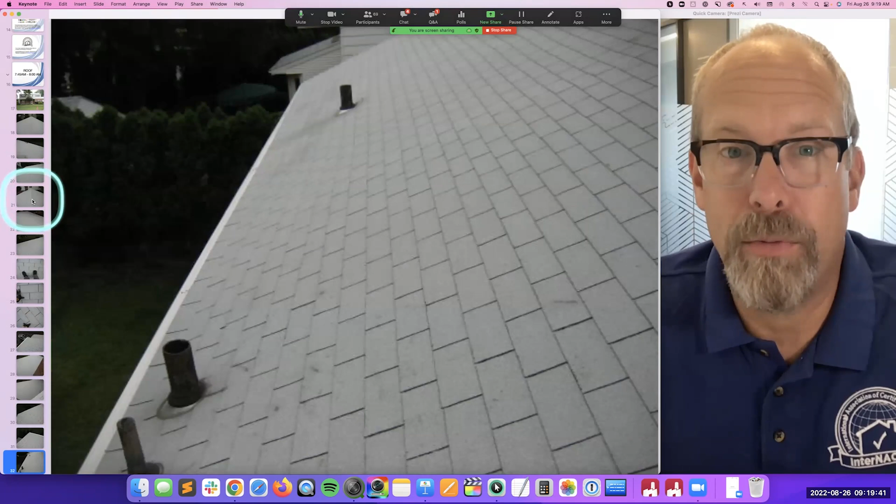Maybe you can just go to the gutter edge. Maybe you can go to the rake board or gable or something, get up there. But when I get up on the roof, if you're going to do it safely, it's not a safe act. If you're not trained or confident, don't go up on the roof. But when I do go up on the roof, I look at everything.

I look at every surface, every plane, and I take a picture of everything. I'll take probably 30 pictures of the roof. Maybe 9 of them will appear in the report. But I'm taking pictures because it's digital, it's free.

And I'm looking at anything that penetrates the roof or comes in contact with the roof, abuts it or bumps into it or is connected to it or touches it. These are flashing areas of vent pipes. There's probably a bathroom kind of thing, kitchen is the main stack, and it's got flashing around it, some neoprene rubber membrane, some metal flashing, and it's tucked under there. And the roofer put some sealant there.

You don't need the sealant if it's installed, but I like it. Looks really good. This is the second one on the other side of the house. Not bad at all. It's a very tight installation, really good.

And there's other things that penetrate through the roof. This is a roof vent, a fan, powered fan. Sometimes they're cracked and damaged. These fasteners, they're never stainless steel. There's always rusting, and there's flashing around here too.

It's the same thing. There's a hole. You cut a hole through the roof shingles, the underlayment, and the sheathing, and you install something through it. And that looks really good.

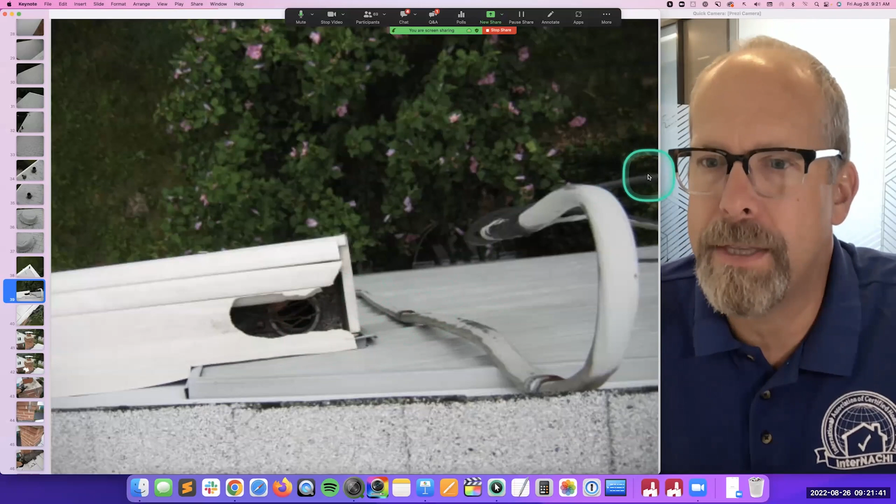And there's the electrical line, the overhead conductors. The service line coming in is probably a drip loop here, and it comes up. This is attached here, and it's probably fastened somewhere else. Then this is the drip loop, and it droops up, and it goes back down. There's probably an electric meter there. And I can see a tree, and it looks like a window well cover, a half circle there, plastic.

So while you're inspecting, there's the attachment point and the connections of the electrical line. And there's the air conditioner there. While you're inspecting one thing, you're looking at other things as well.

There's a chimney, masonry chimney, brick, with a cap on top or a wash, and some of the concrete is cracked a little bit here. Not bad. There's the interior flue. You're not required to inspect the interior of any chimney stack, and this looks good, the cap and the screen.

That bolt there looks a little rusty. I would take it off if I can, just to look inside. I go a little further - I exceed the standards of practice if I can. Sometimes when I look inside a chimney stack, I can see things.

And then this isn't any good. You never need to use a lot of black tar sealant or silicone or paint of any kind on flashing that's properly installed. So if this was properly installed, we wouldn't have this problem here. So we have a problem here. This is a Band-Aid, not a permanent solution. Somebody came up and slapped a lot of roof tar there, and that's not going to work.

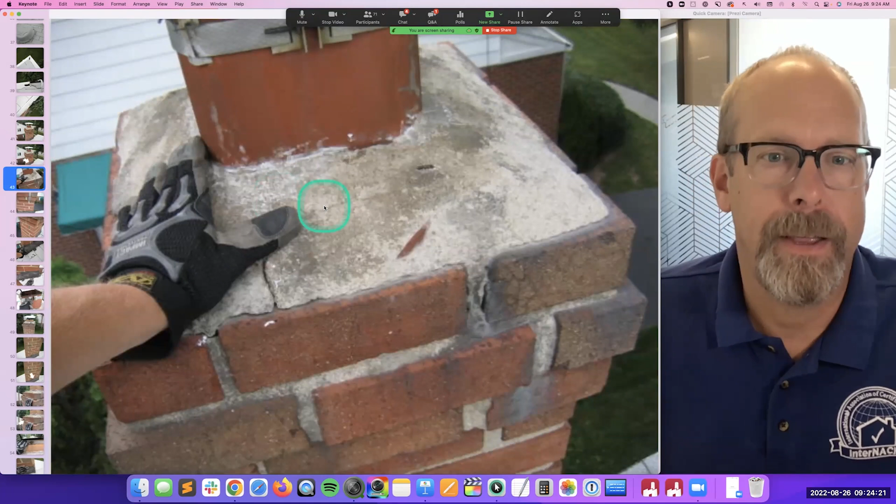Here's the top. I take a look at that. Maybe a little repair there is needed. Not bad.

Masonry looks good, that looks good. That's not - this is not good. There's flashing under there. I bet there's an open edge of flashing here where the step flashing comes up and there isn't a counter flashing or cover flashing. So we're missing something here. Not sure what's going on, but this is not the correct repair.

That's not going to last. And then I can't take this off - this is rusted, I'm not going to break anything. Sometimes when you crank it and try to open it up, maybe if I could just loosen it and then wiggle this up, I can take a look down here.

I like to take a look down the flue. I'm not required to, but sometimes when I do, and I see a hole in the interior flue liner, that's no good. When I see deterioration or maybe even missing liner, that's not good, and so I'll put it in the report. If I don't see anything, I'm not going to comment on the condition of the interior flue - I won't say, oh, the interior flue of the fireplace is in great shape.

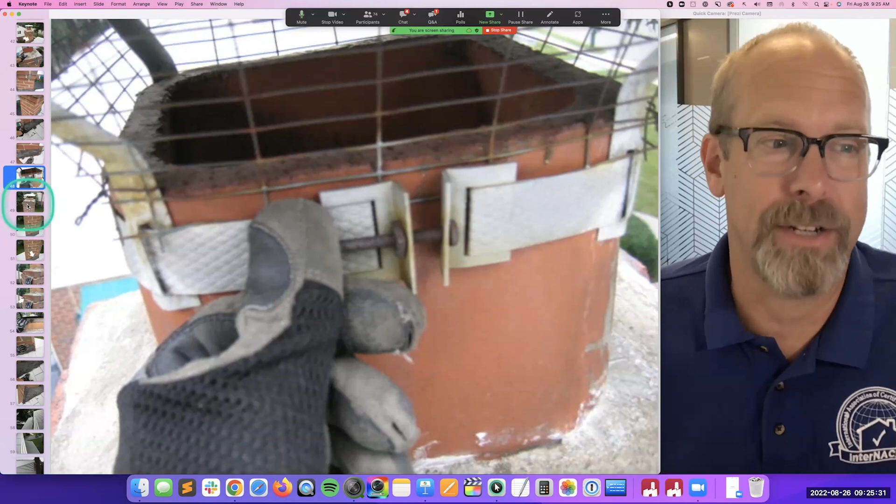Let's see, by the way, is this a fireplace? No, fireplaces are usually rectangular - this is a square flue. This is a heating system. I've got an oil-fired burner appliance heating system, or gas, something. Oil would be a lot dirtier, so it's probably gas.

Here's the rectangular flue, rectangular stack, masonry. This is probably a fireplace here. And if you're in a warm climate without this issue, that's good. This is what we got to do in cold climates - we got to deal with chimney stacks and fireplaces. And so I can see right here that this needs to be repaired.

We've got some open holes for water. So no matter where you are, let's say you don't inspect chimneys because in your area there are no fireplaces - it's just a fun exercise. Imagine water running, falling down and hitting this cap on the fireplace and then dripping down.

We need to divert this water away, and right now you've got an open hole, open holes, open hole. And this can get in, and water can do amazing things - it can destroy things. So we want to divert that water away from this chimney stack.

The stack itself looks pretty good, but again, same contractor, same flashing problem, same repair attempt. And there's the holes there, right? We want water to - oops, that's got to be repaired. We want water to be diverted around and fall through, and that's not happening here. We don't want water to go inside a chimney stack.

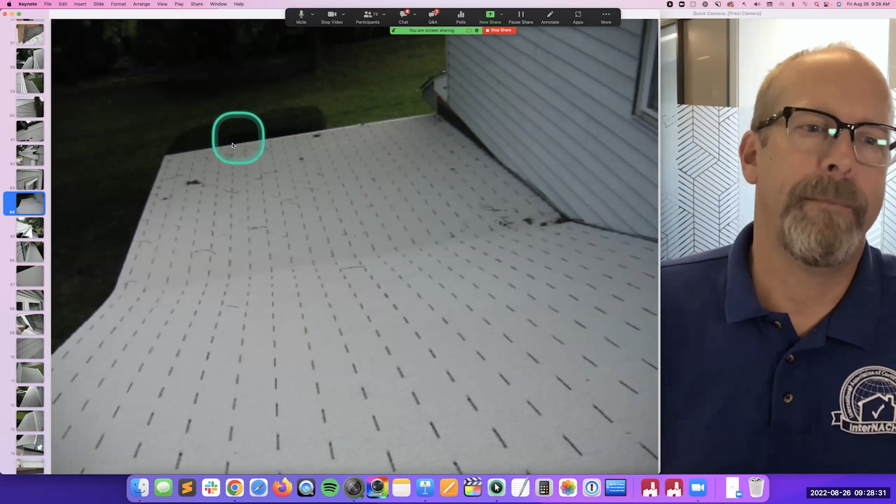This is the roof over the garage, going towards the back. I think it's kind of neat there—same condition, same asphalt three-tab shingles. There's the front porch roof, not bad. I don't see anything wrong with the roof covering materials.

Again, I'm looking at other things when I'm coming down. There's a lot to look at—there's the gutter, there's the fascia. I guess you call this the eaves, but it's really not an overhang.

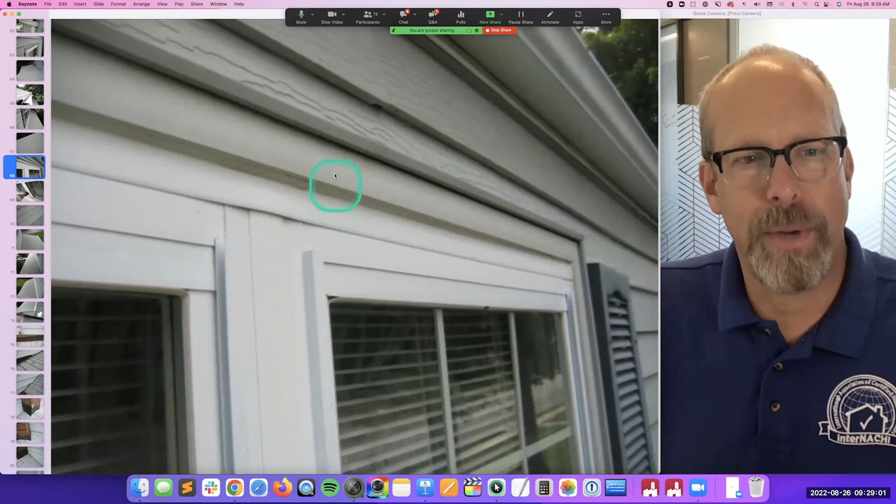There's siding here, and they cut the siding and put in the flashing, the J channel, for the window. The window was a different size—I think the original one was pulled out, so they had to make up for the distance between this window and the original opening. So there's a lot of flashing going on here, but it was done well.

Looking good—aluminum flashing, aluminum siding. Not bad at all.

So when the roof section over the garage intersects with the house brick, same kind of thing with the chimneys, right? It's just gooped up with flashing. And we've got some deterioration of the wood trim—no big deal there, but it's this:

I see the step flashing with every row, but the counter flashing is missing, and that could be a problem. I'm going to try to remember to inspect that now. Same thing here—here's the stack going through the garage roof. I'm going to try to remember to inspect all these intersections.

I love it where there's two different types of material coming in contact with each other, and right here is a really cool spot. There's three, right? There's the aluminum siding, roof covering materials, and the masonry chimney stack. All this stuff has to be done really well—it's basic building standards with water diversion in mind.

You have to divert water away. It's always covered and pushed away, layered and pushed away—you've got to push that away. So if you're in an area that rains a lot, it's really important to think about where that water is going. A healthy home is a dry home, so you want to keep that home nice and dry.

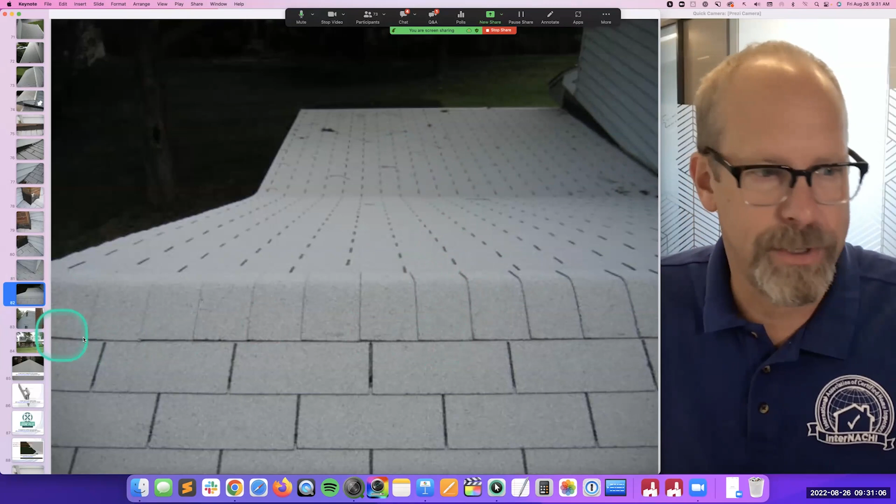And there's that attached garage. I don't think this shingle roof is original to the house, because they attached this garage. And there's the vent, right? There's the gable vent—we saw the roof fan and the gable vents. That's the ventilation. Remember the eaves? They weren't really soffit vents there.

So, okay, now we've got a good picture of the roof. If you don't know how to inspect a roof step by step, don't have a checklist, don't know what to inspect, or aren't sure what to say, that's no problem.

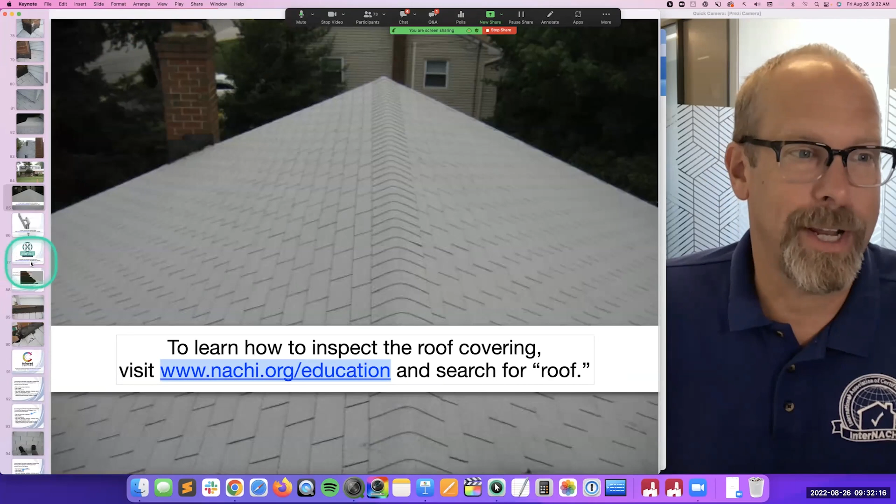It's a really good course. This section covers the difference between roof slope and pitch. What is the difference there? You want to use the word slope. Pitch is... I'll show you what pitch is, ready? This is pitch, and roof slope is that. This is roof slope, and that's pitch.

If you don't know how to use a ladder, don't use one until you take some kind of ladder safety course. We actually have a couple. Go back to the education page and type in ladder, and ladder safety training courses come right up. We also have videos on it as well.

It's a really good course. How do you set up a ladder safely? How do you use a ladder? How do you climb a ladder? How do you put a ladder away? Why would you use a ladder?

If you don't want to use a ladder to get up on a roof, we help you get trained to take the FAA pilot license exam. If you're flying for commercial purposes, you definitely have to get FAA certification and take an exam. And if you want to fly for fun, you have to take an exam too. We have a course to help you take that exam, a recreational exam, just for fun. If you want to fly for fun, you have to have taken that exam.

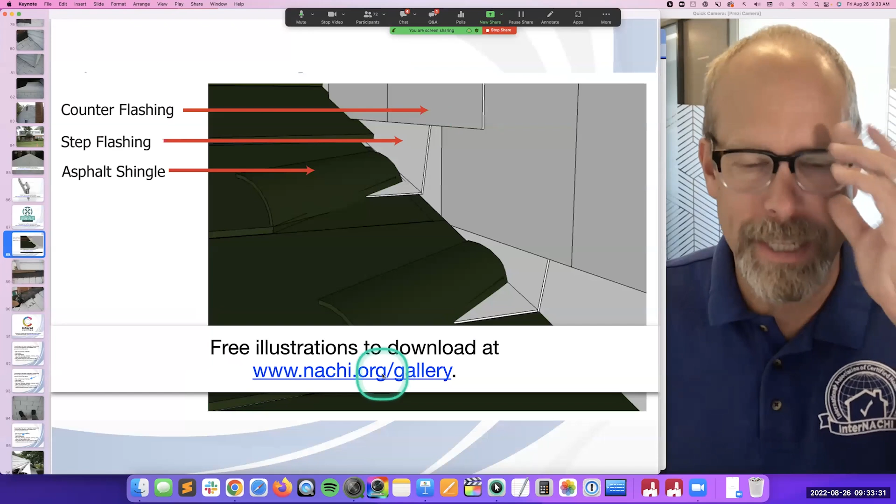Here's a little illustration that helps you learn about flashing, step flashing, and counter flashing. It also helps you explain in your inspection reports what you're talking about. This is a pretty decent illustration showing counter flashing covering the step flashing that tucks under the layers of shingles. You can download these illustrations from nachi.org/gallery, our gallery of illustrations, and it'll help explain what's going on here and why this at the brick and chimney isn't good either.

Now we were talking about water, right? Water is a lot of fun to see when you're a trained home inspector, and sometimes it causes mold and wood damage and things like that. But in order to see things that other inspectors can't see with their eyes in relation to moisture intrusion, water penetration, water problems, roof leaks at flashing areas, you should get an infrared camera. They're $400, $500, $600, whatever, but it allows you to see things that no one else can. So it's a great investment.

If you're new, I would make some money first. Do about 10 inspections, 20 inspections first. Build up some money and then invest in a really nice tool like infrared, right? And you can become infrared certified at nachi.org/certification.

Finally, we're getting to the standards of practice. Standards of practice tells you what you're supposed to inspect and what you don't have to inspect. Right here it says roof covering materials. You are required to inspect the roof covering materials. You're not required to inspect the roof system. A system comprises many different parts, and you're not required to inspect the entire roof system. You're required to inspect the roof covering materials. That phrase is really important.

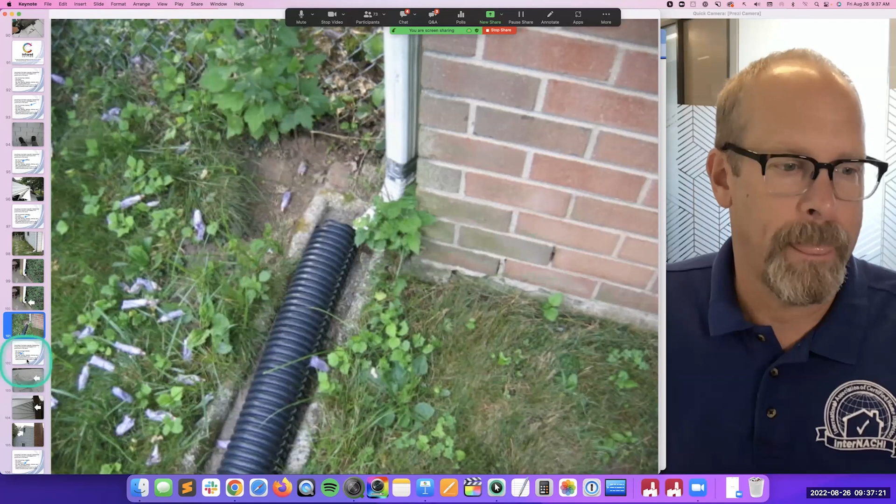According to the standards of practice, we have to inspect vents. Got it - roof fan, remember that roof fan? Remember the gable vent? There's another gable vent on the other side of the house. So I know there's an attic space in here.

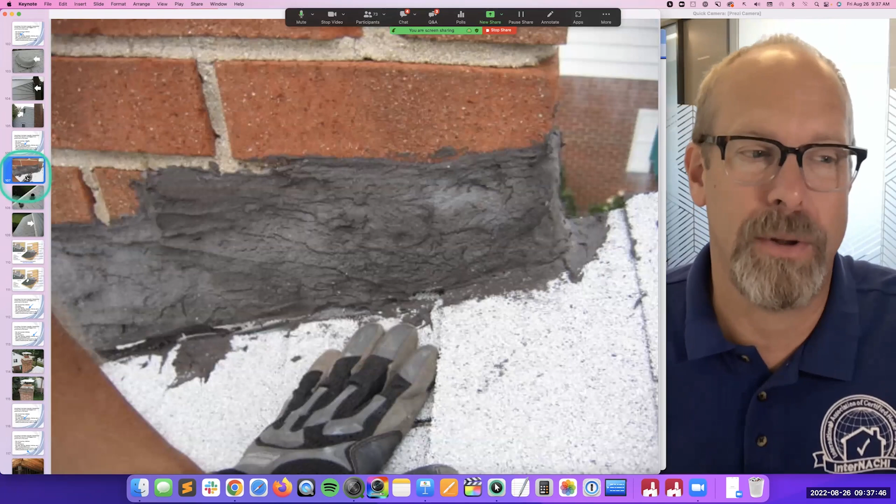We're required to inspect the flashing. We've got flashing problems, right? It could be there, it could be installed, but it's not installed properly. I'm not supposed to see this. There's flashing around the vent pipes, anything that penetrates through the roof. And there's flashing where the roof meets a wall, maybe of the house, or the siding. We have an illustration to help you with that - remember, it's at nachi.org/gallery.

So you've got the components of this flashing area, right? You can't see all these components, but here they are. They're all layered together in relation to diverting water away from the house, all layered in a way that diverts water away from the house.

And so we inspected this little guy that's observable, right? That's the flashing, and the siding is the counter flashing. So if we go back up, there's the flashing - that's nice. The siding is the counter flashing, and this is the roof covering materials. Those are the three things we can see. Seems to be in good shape.

To explain what we're doing - inspecting, describing, and reporting - you can use an illustration from InterNACHI's gallery in your inspection report. It really makes the inspection report, like my report that we're going to go over, look really good.

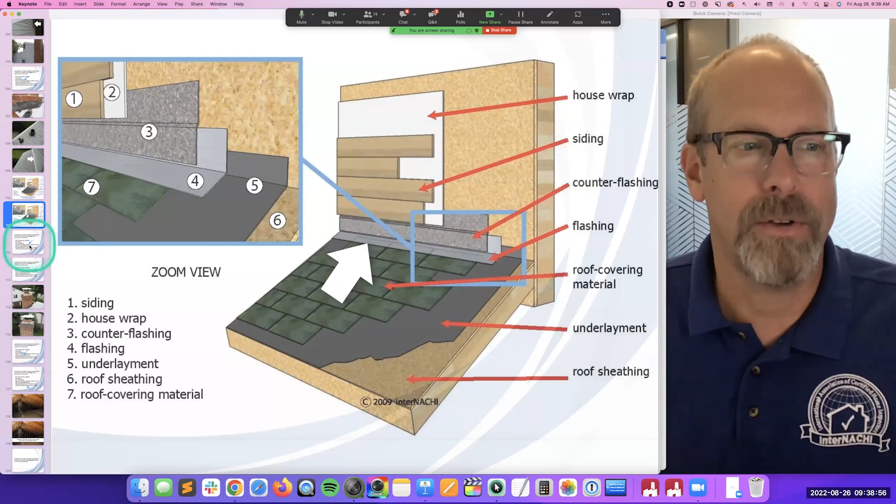Skylights, we don't have any skylights. Chimney, we got some chimneys - 2 chimneys, heating system, fireplace. We got flashing problems, right? And also some mortar that's missing.

And other roof penetrations - we saw the other roof penetrations and the structure from the roof, from the panels and doors and stairs. That's basically the attic, if you can get in the attic. So I don't go in the attic first, I do it around 2 hours in. I'll be in the attic space.

Some inspectors start in the attic and want to inspect underneath before they get up on the roof. That's fine - whatever your inspection process is, make sure you have one, write it down, and follow it. Hopefully it's concise and helps you be efficient with your time. So the inspection of the under-roof attic space, for me, actually comes later in the process, but in the standards of practice it's tucked with the roof section.

You're required to describe things - to inspect, describe, and report every system. So we have to describe the roof covering materials, 3-tab asphalt shingles, and report any roof leaks or need of correction of observed indications of active roof leaks. I didn't see any in this house, nothing active, but I'm going to make recommendations for corrections at the flashing.

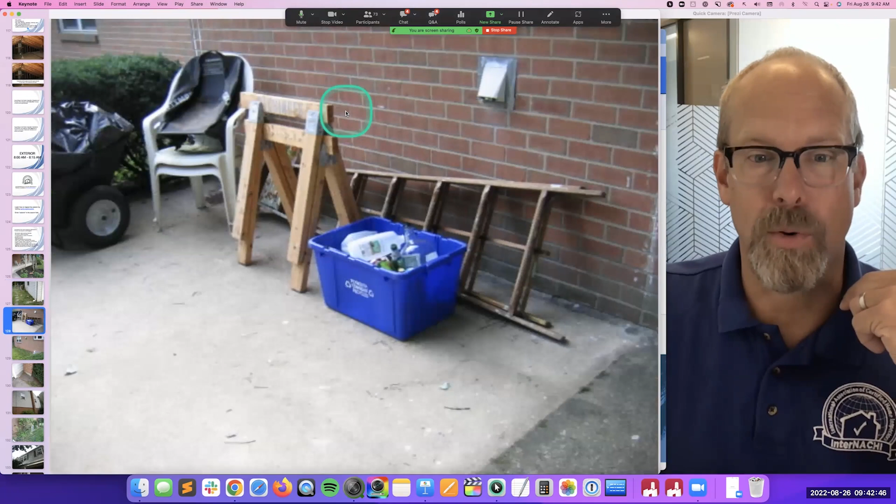So I'm going around the bend and looking at things. Well, this we already saw - the downspout, the grading looks good, the siding. That's not too loose, that's okay. Going around the corner, there's a concrete patio in the back with brick, and that looks like a dryer vent with ductwork on it. I can't see everything because there's personal items, and I'm not required to move them.

Then there's the brick exterior - really nice, a little exposed foundation, so that's good. There's a window well, looks like maybe a kitchen window, maybe a bedroom - probably a bathroom. Then there's a little patching here, like this area got some water puddling up and they threw in some asphalt or something. I don't know what's going on there to divert water away from that corner.

I'll try to remember that in the basement. There's the chimney stack on the side of the house, the air conditioner unit, electric meter, a service line, a window well, another window well. There's a garden hose holder, so I know that's a spigot hose bib, and the grading is sloped away, so that's good. There's a lot of vegetation there - I can't see everything, so that's going to be an inspection restriction in my report.

And then there's the siding, the windows, and then I'm at the front again. Then I'm gonna go around again.

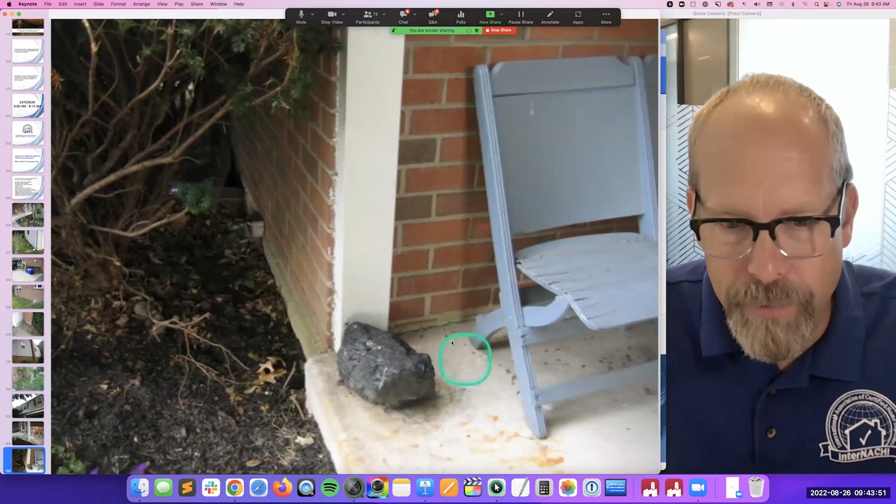I'm taking a look where the front porch meets the front of the house, and there's a little crack and settlement - doesn't look too bad. There's something going on there I can't really see. The front porch left, and this is right - this looks good. Then the front door, that step looks good, no deterioration, no wood rot there. Then the sidewalk, no trip hazards there.

And the driveway looks great, no trip hazards or major cracks. There's the main vent stack for this public sewer, and the asphalt looks good. The bottom of the garage door and the door panels look really good.

So I'm going around and looking at the siding again. The back side of the siding looks really good - we already saw this from the roof. There's a spotlight there and a spotlight here, and there's the underside of this. They didn't want squirrels or birds to go into this little opening where the double beam is, the load-bearing beam. There's a little overhang, a little detail of a bracket and spotlight, and it looks good. I don't see any problems with the siding - looks really tight.

This looks like a little flat area where maybe when it rains really hard it pours a little bit and puddles, not sure. There's window well covers, like every window of the basement. So there's a full story below ground level, and there's a window well - a window in the foundation wall, like a half circle. It's not really a fire and rescue escape, just a window, and they've got these nice new plastic covers, the stickers even on it.

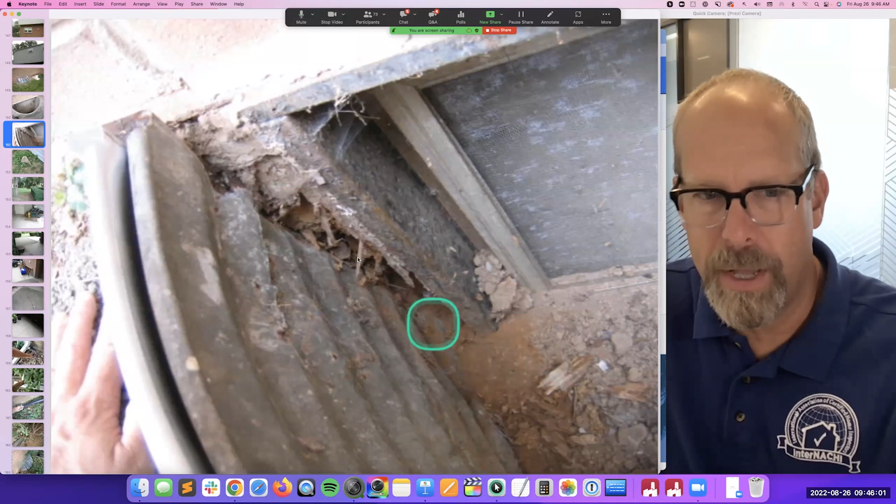Then there's some moisture here and some puddling, so now I'm thinking maybe there's some issues with water penetration going in. So I open up a window well and look inside, and it's filled with dirt and stone, with dirt coming through the sides. There's mud, and I don't think it drains - it's real close, coming into the window. So I'm gonna keep that to myself, just paying attention to how all this water is pushing the dirt through the window well. This is where things touch - I like to inspect where two different materials, two different components intersect. So there's this, and there's this coming in.

On the other side, I wrap around again, there's a tree stump. Ideally, you'd grind that down and get rid of it. This is like candy for termites and carpenter ants - it's just an open invitation. You know how a farm calls you in for dinner, ding ding ding ding? That's what this is. Dinner. So you got to get rid of that.

And then this was patched up. There's a little rot. We actually have a tree course on how to inspect trees, which might be interesting to you. You don't have to, but anything near a house, I'll take a look at it and comment on what we've got here.

Something to monitor. In the back, you've got a sloping concrete floor. That's really nice because a lot of it is exposed to the rain. So you want that nice slope, not a trip hazard, just a nice gradual slope. There's a percentage specified in the code, the International Residential Code, for just a nice slope.

It should not be a negative slope. A negative slope is where this is actually sloping towards the house. We don't want that - we don't want to be catching water with a hard surface and directing it towards the house. We want to be directing it away from the house, sloping it away from the house.

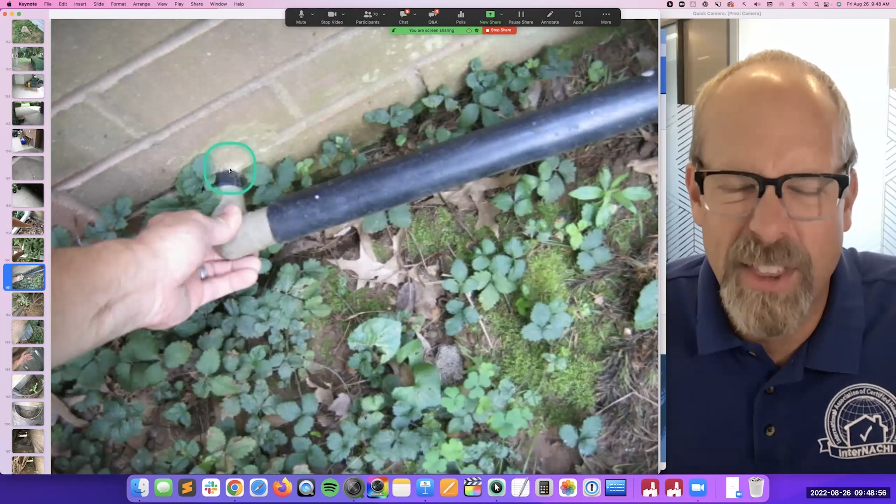There's another pipe here too. Now I'm thinking, what are all these pipes next to the downspouts? Oh, sump pumps - I bet there's a sump pump in the basement and it's discharging outside. I'm not sure where these pipes go, so it's a good question. Oh, there's another one - the third pipe. I think there are 3 sump pumps. I'm a little concerned, and I can't possibly follow this. I don't know where this is going.

This bush here is really close to the house foundation, and there's a lot going on in here. Like this is a low area, looks kind of muddy and wet. There's an old downspout discharge pipe here, a splash block. There's something going on with water, right? Indications of what - I'm not going to say anything right now, but I don't know.

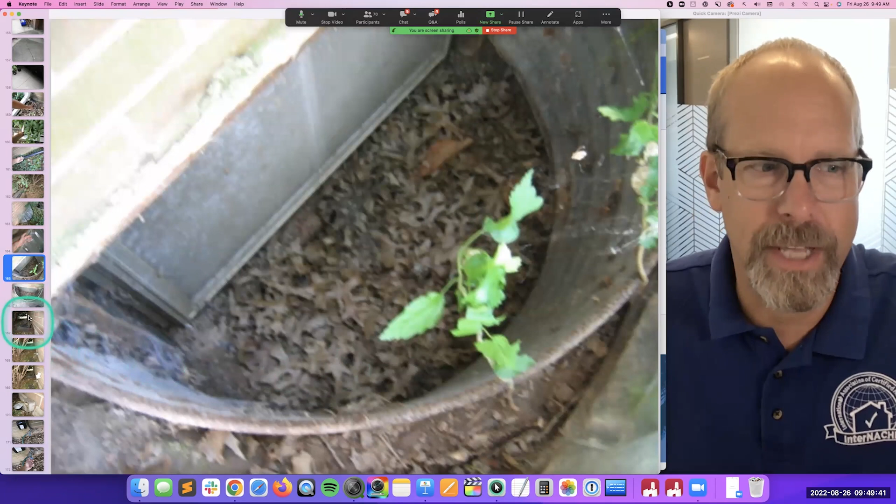This is an old window well cover. It's been grown over and the ground has crept up to meet it, so I try to open it up. It's cracked. I take a look inside - it's just filled with debris, just like the other one. There's a third one. This one here is interesting because there's 2 window wells.

Can you see them? There's 2 of them. I think I know why. This one here is original to the house, and then they had water problems and water kept coming in. So they added dirt around the house to get that slope away from the house. You want the ground around the house to slope away, like 6 inches for the first 10 feet around the perimeter. But when they added more dirt, this was too short, so they got another window well, another half circle, and added another one on top. Now I see efforts to fix water problems around the house.

Okay, so I can't wait to get in the basement. Kind of excited - this is the fun stuff of being a home inspector.

This one here is under the bushes. I crawled under there. You can see the rusted window well and the cover isn't there, so it's probably some water intrusion going on there. And that's the window well under the bushes. When I was coming back out, I almost tripped on this, and that's an electrical box.

So you bump into things literally. And that's the one thing I want you to get out of this class: when you have an inspection process and a standard by which you inspect, and you follow that standard, you are efficient with your time, you provide a really great service, you reduce the number of mistakes you make, and the defects that may exist in a home literally pop out at you.

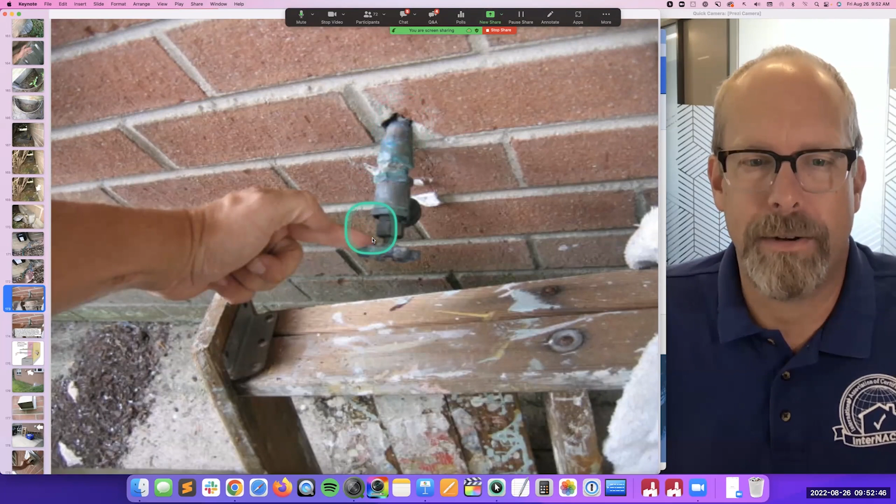So hose bibs are subject to freezing temperatures, including frost-proof hose bibs. They should have their stem extended through the building insulation into an open, heated, or semi-conditioned space. There should also be an accessible shutoff valve installed on the water supply pipe that leads to the hose bib on the inside of the house.

Still going around the house. I don't know what this is. I don't think it's a dryer vent — it looks too clean, and it has a screen, and there is no lint. I think it's a bathroom exhaust fan, or maybe the kitchen exhaust fan, something. If I don't know, I'm not going to say. I'm just going to look.

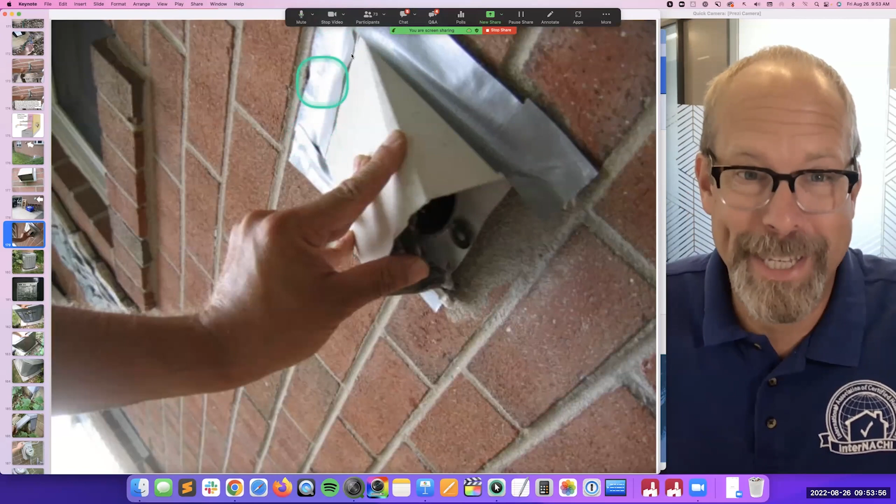Well, that looks pretty good. It's installed. It can't be a dryer vent — we can't have a screen on a dryer exhaust. Here's the dryer exhaust, it's pretty obvious, there's a lot of lint coming out. It's open, that's good, but it's been duct taped. So that's no good, right?

Air conditioner, new to the house. Nice base, it's fantastic, I'm glad to see that. Got the label, got the manufacturer. It's stable. Pictures of the exterior, no damage, relatively new, sealed, installed well, electric disconnect.

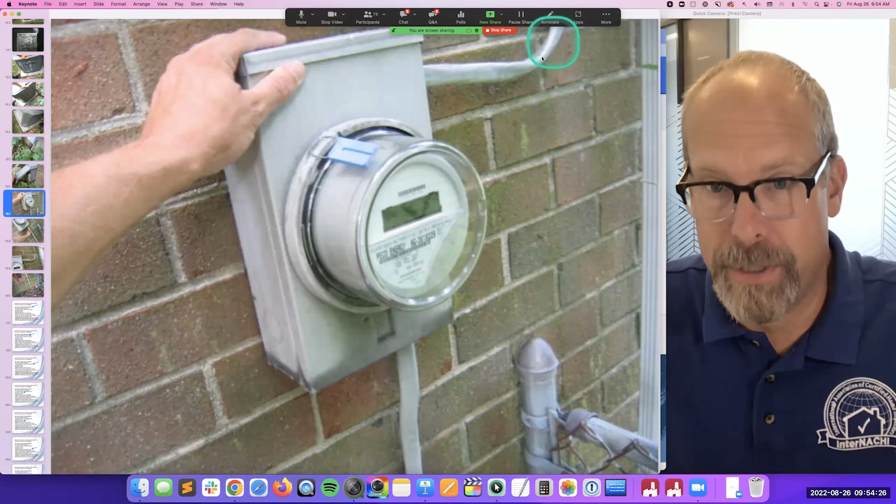And then there's the electric meter box, electric meter box. There's the service entrance, service line coming in. That one's going to the electrical panel, I bet, down in the basement. All that line looks good — a little rust, minor, no big deal, no damage, looking really good. I don't see a grounding, usually like a grounding conductor, but grounding electrode conductor, I can't see it. It's okay, if you can't see it, you can't see it.

So that's the exterior — that's about 15, maybe 20 minutes. And this is all the things that we're required to inspect: the exterior wall covering materials, we did that. Soffit, eaves, and fascia, we did that.

Representative number of windows — can't inspect every window, second floor windows are too far away. All exterior doors, we did that. Flashing and trim, adjacent walkways and driveways, stairs, stoops, stairways, and ramps, we did that. Porches, patios, decks, balconies, and carports.

Remember that crack in the concrete? Railings, guard handrails — we don't have any. Vegetation — yeah, we got some vegetation problem in that old tree stump and the damage to the existing tree, and some dense vegetation. Surface drainage — we got some concerns about that. Retaining walls, none of those. And the grading around the property — remember that? Yeah, the grading around the property where it may adversely affect the structure due to moisture intrusion.

I think that's our concern. I'm not going to say anything to my client quite yet. I'll tell them I'm not going to make any conclusions at all — that's not my job. My job is to inspect, describe, and report, and make recommendations to correct if needed. So I'm just going to hold off on that until I get in the basement.

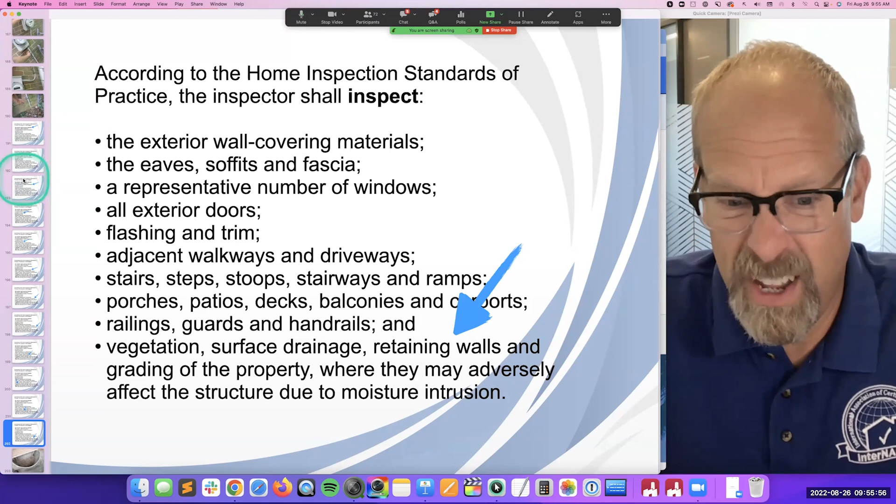We're required to describe the type of exterior wall covering materials. That's pretty easy. And report any problems with railings.

Okay, the next big system, do you remember, is heating. And heating takes me about 15 minutes. Let's have two systems, then that's a half an hour.

And they're split, maybe one in the attic. But this one has one heating system. And it's not that bad to inspect a heating system. 15 minutes, right? Turn it on, turn it off. And there's a standard by which you do that using normal operating controls. That's why it doesn't have to take very long.

I'm not an HVAC technician. I'm going to use normal operating controls, which basically means the thermostat. Here's the heating system, and it's the cooling system as well. I can see the air conditioner here. I don't know why they turn this around.

But the heating system is here. It should be facing outwards so you can service it. So going around a corner, funny installation. And then this is cold air return through an air filter.

So it's forced air. I think, is it a heat pump? Or I see a gas pipe for the hot water tank. I bet it's a furnace, gas furnace. And so it gets heated up here, cooled off here.

This is a humidifier, an old humidifier, to humidify the air in the wintertime, because in cold climates, cold air is dry. So they like to humidify the air.

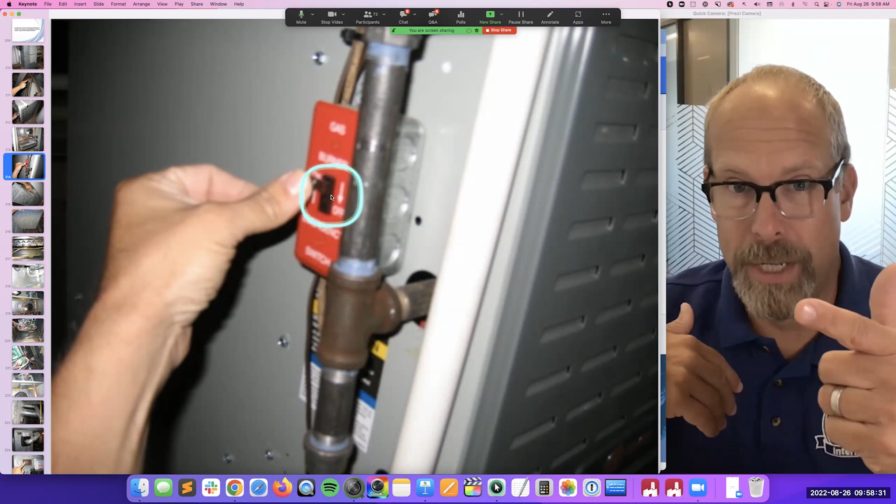I turn the service switch on, and I look and listen. And I listen for the cycle. There's a bunch of things that happen in a cycle, and we describe that in the course, How to Inspect a Heating System. It's also listed, what happens in a cycle for a gas furnace, in our checklist, and I can show you where those are.

Oh, and then it goes through the cycle, and then I turn off the unit, go upstairs, I let the thermostat run for a little bit, come back down, turn it on, and then I go back and I turn the air conditioning on.

It sounds really bad, but it's not. So it's back and forth a few times, 3 times. And in that way, I get to watch the furnace turn on in heating mode. I'm not going to heat up the whole house. I just want to hear the sequence of the burner and the draft inducer fan.

And then I turn on the air conditioning. I don't want to cool off the whole house. I just want to see a little temperature difference.

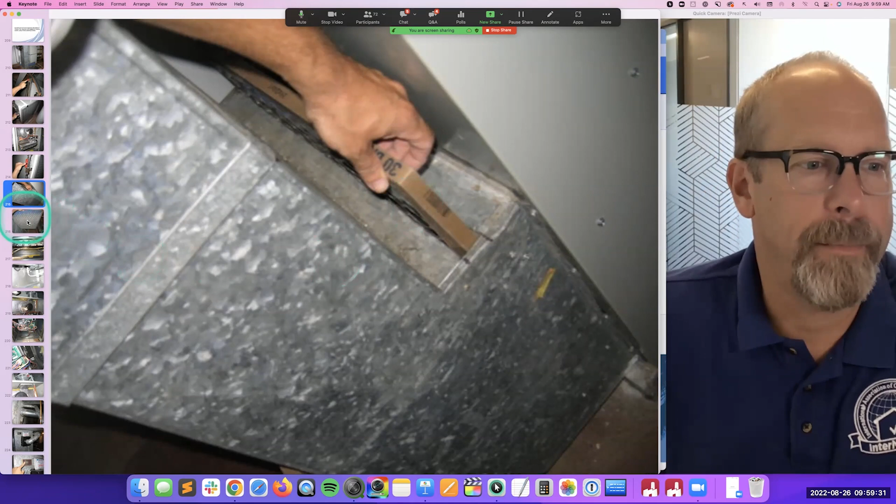Air filter is dirty, no big deal. That's in the burner ports. They're clean, that's great, nothing going on there. Igniter, draft inducer fan. I'm not concerned about any of this.

Looks great to me. I know about half of what is going on here. I don't know everything, don't need to, just a home inspector. But I'm looking for anything, like there's the motor there, anything that's wrong. One of the things I like to do is stick my hand in there. Don't.

Make sure this is not loose. I like to wiggle it a little bit and see what's going on, look for bad wiring, disconnected wiring, things that are maybe burnt or missing parts. All the sensors should be there. By the time you get here, there's a sensor on the door panel, there it is, that turns the unit off. So there's a couple things that when you remove a panel, there's a safety switch you're actually testing. And all this looks good.

The way the flue connector goes into the chimney stack. And this is the hot water tank, hot water source, smaller diameter. And this is the furnace.

All right, that's the humidifier. Humidifies the air. There's a little control.

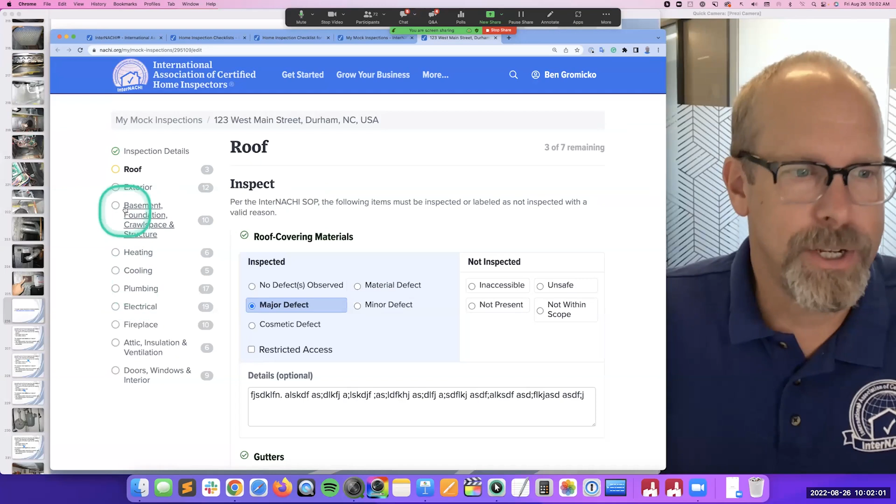So you enter your inspection details, the property address, get to the roof section. Let's jump to the exterior of the checklist. I wouldn't give this report to a client, you can convert it into a PDF, but it's just for practice. So if you need practice, this is a great system. Use InterNACHI's home inspection checklist software.

Exterior wall covering materials, no defects. Eaves, soffit, and fascia, no defects observed. Windows, no defects observed. All exterior doors, no defects. Flashing and trim of the siding, no defects. Adjacent walkways, no problems. Steps, stoops, stairways, and ramps, no defects observed. Porches, patios, decks, and carports, no defects, but there was a crack in the concrete patio in the back.

Monitoring is recommended. Okay, this is just for you, this isn't for your client. Guards, handrails, no problems with that. Vegetation, yep, so I have a minor defect. There's the tree that's there, and there's dense vegetation and inspection restriction.

Restricted access. Describe the type of exterior wall. So you go through, it's aluminum siding, report, did you note any improper spec? No. And you continue to the basement.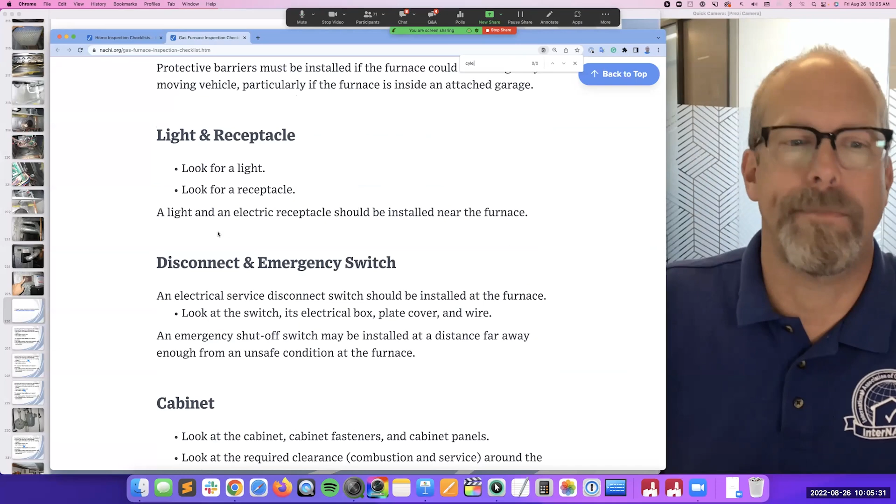So you go down and there's the gas furnace inspection checklist. You open up the gas furnace inspection checklist, you can download the checklist right here, it's in a Word document, so you can tweak it yourself. Let's see, is it cycle? No, something else, oh here it is. Here's the burner switch and the gas shutoff valve and the fan induced motor and condensate and igniter and flame and air distribution system. And then there's a sequence of operation. We also talk about airflow and delta T. So it's a really good checklist. We have lots of other checklists.

There's a home energy checklist, mold inspection, pool and spa checklist, radon mitigation inspection checklist.

When you do a home inspection, if there's a radon mitigation system, you can inspect it according to modern standards to see if it's installed properly. And someone's going to say, well, it was built to code back then, right?

It's probably not working. According to the home inspection standards of practice, we have to inspect the heating system with normal operating controls, the thermostat. We need to describe where the thermostat is, the energy source, and the heating method. The energy source here is natural gas.

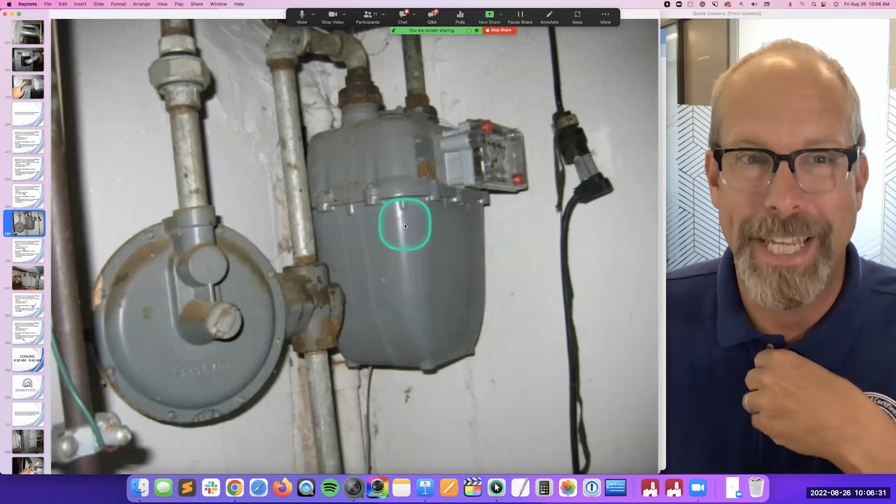In this old home, the gas meter is on the inside. Personally, I don't like that, but it's okay. The heating method is ductwork, so we saw that ductwork.

We have to report any heating system that didn't operate or was inaccessible. We didn't have that problem. Now cooling, another 15 minutes, maybe even less.

According to the standards of practice, we're required to inspect the cooling system using normal operating controls. It's the same thermostat. Here's the same unit. There's the refrigerant line, suction line, and liquid line.

There's the condensate line coming from the drain pan of the coil, and it drains. I'm following it, pan drains down. Where's it drain to? Because I know I'm underground, into a sump pump. Where's the sump pump go?

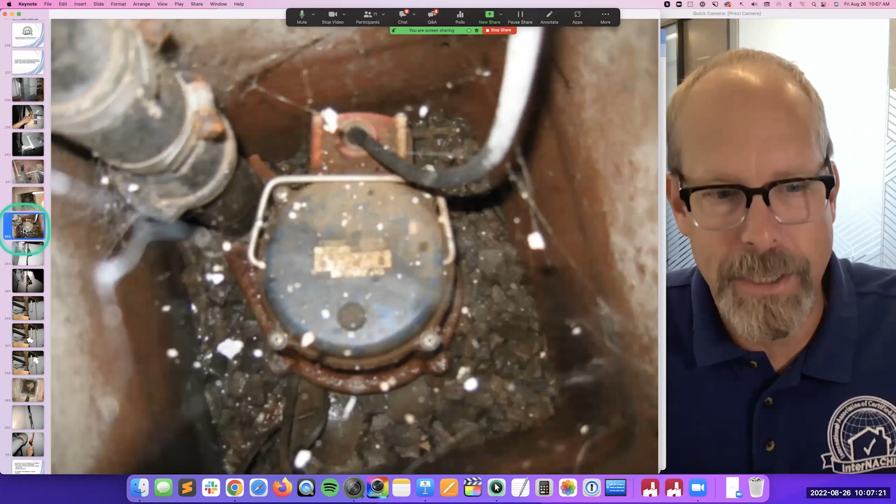Well, I can't turn it on. I could fill this up. There's no float, it's an interior float. So I'm just going to follow the discharge pipe.

The power to the sump pump is not good. Here's the grounding, a 3-prong receptacle, then it goes to a 2-prong, then to a 3-prong, then to an extension cord. This is supposed to be tied to each other because they keep separating, and this is no good. You want a nice ground.

Connection, so this has to be fixed. And this shouldn't be on an extension cord. It should really be in a wall receptacle on its own breaker, maybe. Here's the discharge pipe, found the sump pump discharge pipe.

It doesn't go outside, it goes into the public sewer system, which is against code. We're not code inspectors, but you all should know the plumbing standard. You're not supposed to put groundwater into your public sewer system. You shouldn't be pumping groundwater from your sump pump into your sewer line, your drainage line, your drain waste vent system of a house.

It should be going outside, and it used to go outside. For some reason, they changed their mind. So this used to go right here, and used to discharge outside. That's one of the 2, 3, 4 pipes that I saw outside. The seller knows what's going on.

I don't know what this is, some kind of sock or something. They wanted to stop bugs and insects from crawling into the pipe. So instead of just removing the pipe properly and capping it, they stuck this thing in, I don't know what it is. It's just a big mess. So this should discharge outside.

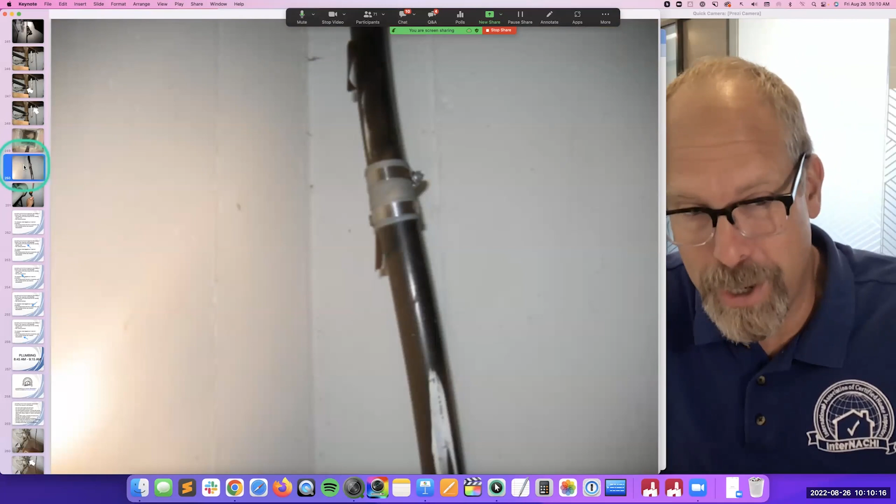So if they have a radon problem, it's coming right out of here. And this is not a nice plastic clean container, there's no cover on it. This is also plugged into an extension cord. This also goes outside, and it's plugged into an extension cord.

So now we have moisture issues, grading issues on the outside, indications of things going on outside, and indications of moisture intrusion and water problems on the inside. And the solution isn't very good. There's extension cords being used, pipes going in different directions not really discharging anywhere, and I can't find the ends of the discharge. There's evidence of standing water and a lot of moisture in the sump pump containers, and there's plumbing issues with the discharge, for one at least.

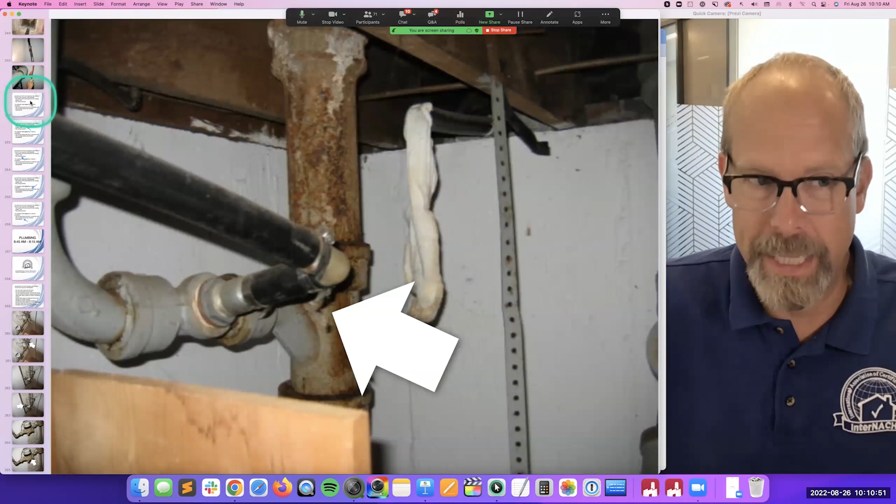That's just the cooling system. I still have to describe the location of the thermostat and the cooling method. It's the same thing—ductwork, and any cooling system that didn't operate or is deemed inaccessible.

Plumbing—we did a little bit of that with the sump pump. According to the standard of practice, I have to inspect all this stuff. I think of water coming in, plumbing, and water going out. Water coming in is the public water, the distribution water that comes into the house, and then drain waste vent going out. That's how I think of water.

Through a shutoff valve, through the meter, another shutoff valve. The meter itself has a little bit of rust on the bottom. I'm not concerned about it—I think it's just moisture—but I'm going to rub my hand along the bottom of the meter. And if it comes out any rust that looks like a water streak, I'm going to say it's leaking.

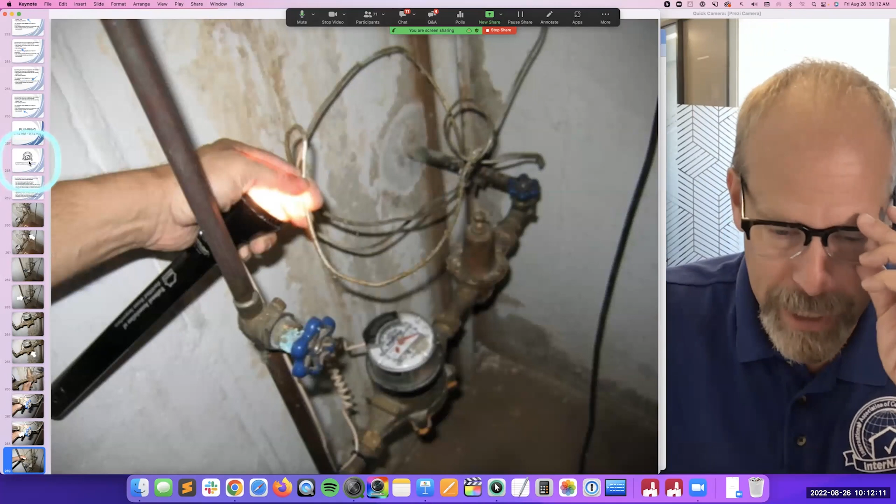It doesn't have to be wet for it to be an active leak, especially a plumbing leak at a valve. So if you're wondering what to say to a contractor, real estate agent, or seller who wants to argue with you, you don't have to. This is an indication of an active plumbing leak that has sealed itself and it's not leaking, but if you want to fool around with it, you can get it to be wet and dripping.

There's the bonding wire to the water line. We can talk about that later.

Now it's drain waste vent out, and this is a serious problem. This looks like a toilet flange that is leaking upstairs somewhere, and that's an active leak. I don't need an infrared or a moisture meter to tell that, and I'm not using my hand either.

And then there's all this wood damage underneath, and this is what this rust is all about. It's cast iron—cast iron tends to show a lot of rust when it's in poor shape. I use my screwdriver and try to poke right about there. If it can go in, that means that cast iron pipe was paper thin. You should not be able to go through with your screwdriver.

So I like to tap on metal pipes, especially drain waste pipes, not distribution. These look great—it was just that one toilet area that wasn't going very well. I want to see nice secured straps and supports every few feet, and the slope—not the pitch, the slope—of the drain waste vent sewer pipe going in the correct direction, downhill. It's got to go downhill.

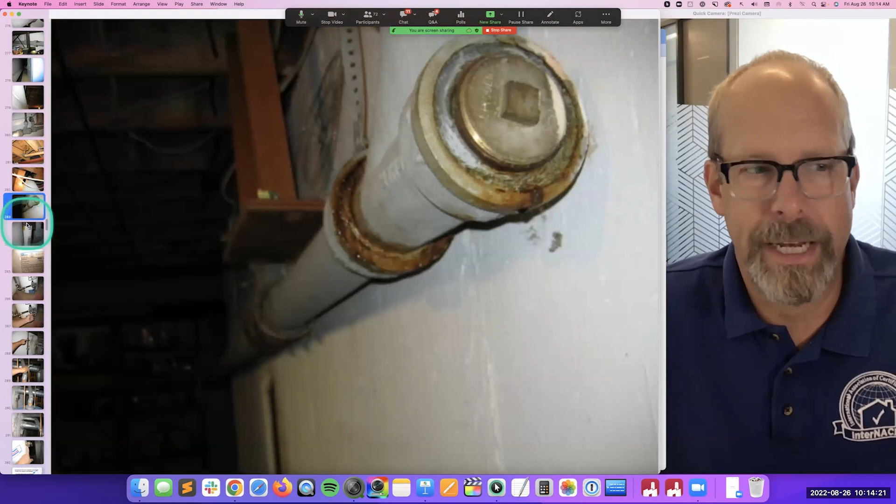And then got some copper coming from the sink or something above, and there's the stack, the vent stack, going up through the floors of the house. There's the clean out at the transition. There's the hot water source—so water coming in, water coming out. Where does it get heated?

Gas hot water tank, 40 gallons, gas drip—not really long, a big drip, but that's okay. It's not the best installation. Ideally it's right here, the drip.

That's where you turn it. I don't turn it—I don't turn any gas valves, I don't turn any water valves. There's no need for me to do that. If it turns on, great; if it doesn't turn off, that's not great, and since I turned it on, I'd be responsible.

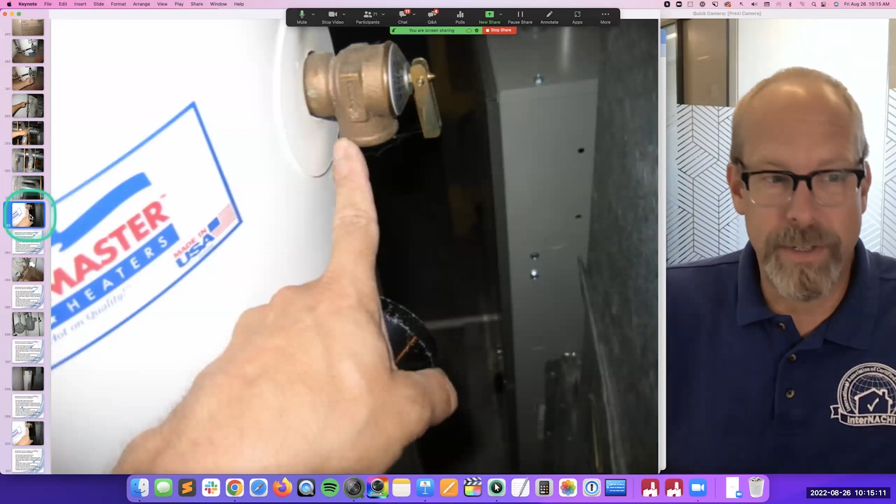There's the old gas shutoff valve, old water valve, and there's the flue. So cold water coming in, hot water going out, and the flue connection, vent connection. The TPR valve is missing. There are 14 requirements according to the International Residential Code for a TPR valve extension pipe—just the discharge pipe, 14 requirements. One of them is it has to be there, and this one isn't at all. So that's an easy call on me.

And I can inspect a hot water tank in several minutes according to my checklist.

We have a checklist on my phone, with even the 14 requirements for that discharge. It's an easy call because I'm following an inspection procedure, inspecting this system over and over again in the same way.

Here's what I'm required to inspect: the water supply shutoff valve, did that. Fuel shutoff valve, did that. Water heating equipment, including TPR valves, did that. There's a TPR valve missing, that's a defect.

Interior water supply, including all fixtures and faucets by running the water, I'll do that. I have to inspect all the toilets by flushing them, and all the sinks, tubs, and showers for functional drainage. I'll run water at the sinks, flush all the toilets, and check the showers.

Then there's the drain waste vent system, got a problem there. And the sump pumps, we got a problem there too. So we found some defects for sure.

You have to describe whether the water supply is public or private. It's public. Location of the water supply, fuel supply, and location of any fuel storage tank. There's no fuel storage tank. The capacity of the water system is 40 gallons, and I have to report all these as needing correction.

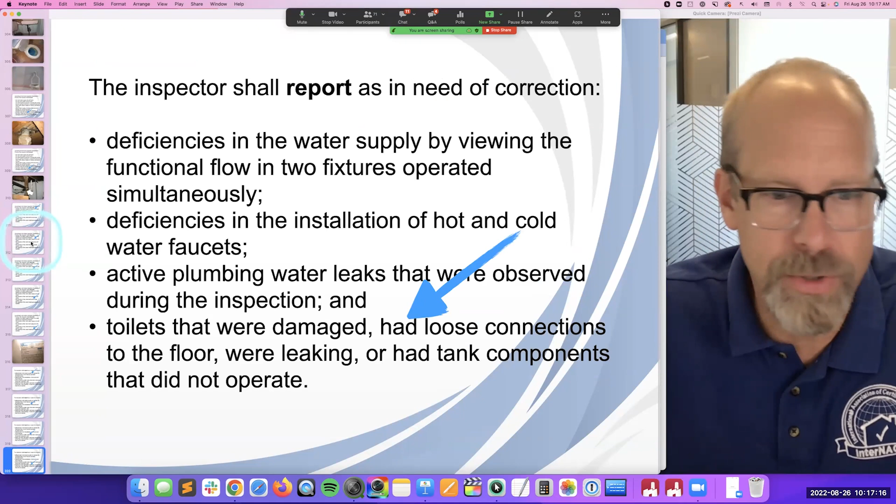Any leaks, any toilets that are damaged, loose components, leaking tanks, things like that, I'll do that later.

I really like this one, trying to find that toilet. You may get into the bathroom and it's tiled and the tile looks great. You can't tell a difference, nothing wrong, it's secured to the floor and looks great. But from underneath that tiled floor and that toilet, there's something going on. It's always great to get underneath.

Where are we? Electrical. Electrical's not very long. According to the standards of practice, there's a bunch of things I have to inspect. It looks overwhelming, but if you have a checklist on a mobile device as you're inspecting, it's no big deal.

Let's do it. Service drop. What's a service drop? Well, it's useful to use the same terminology as everyone else, contractors and code inspectors. Good resources are the International Residential Code, to find out what all that stuff means, or InterNACHI's free online course on how to perform residential electrical inspections. It has a section called service terminology, and we're going to talk about...

Service entrance cables, sheathing, point of connection, overhead service conductors, service drops, masts, laterals, meters, GECs, all that good stuff. That's in the free online electrical course. You can just take the course, open it up, and look at the first section that covers terminology.

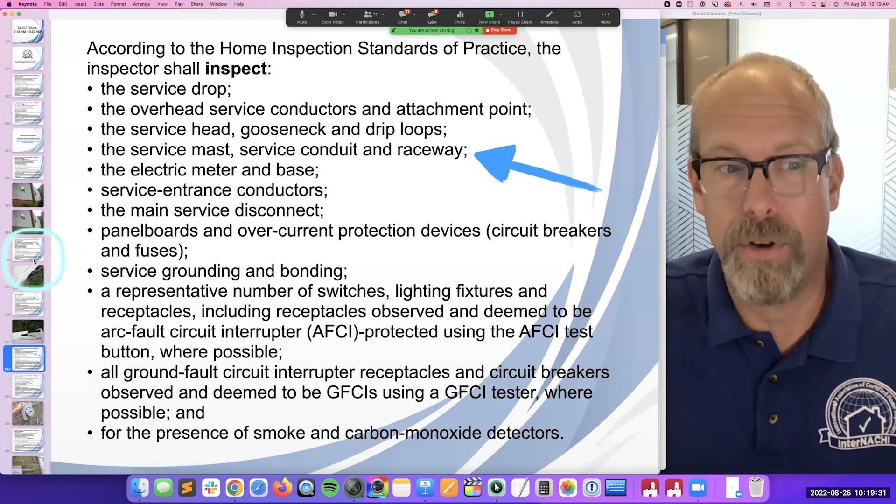We got that. Service mast, conduit, raceway, we don't have underground, we have overhead. Electric meter and base, there it is, we saw that. Service entrance conductors, we got that and that and that.

Main disconnect, that's the electrical panel coming up, and this is the main service disconnect. It has to be clearly marked. It should be. The main disconnect must be either inside or outside the house, as close to the service conductors where they enter the house. It can't be in a bathroom, and no more than six breakers can be used to disconnect the service conductors.

Panel boards, have to inspect those, there's only one in this house. And overcurrent protection devices, that's circuit breakers and fuses. If you find fuses, they really should be replaced.

There's the panel, the main panel in the basement, and it's labeled, Cutler Hammer. That's the main panel with the disconnect. This breaker has tape on it. Anytime I have a breaker with tape on it, something's going on. Everything's filled.

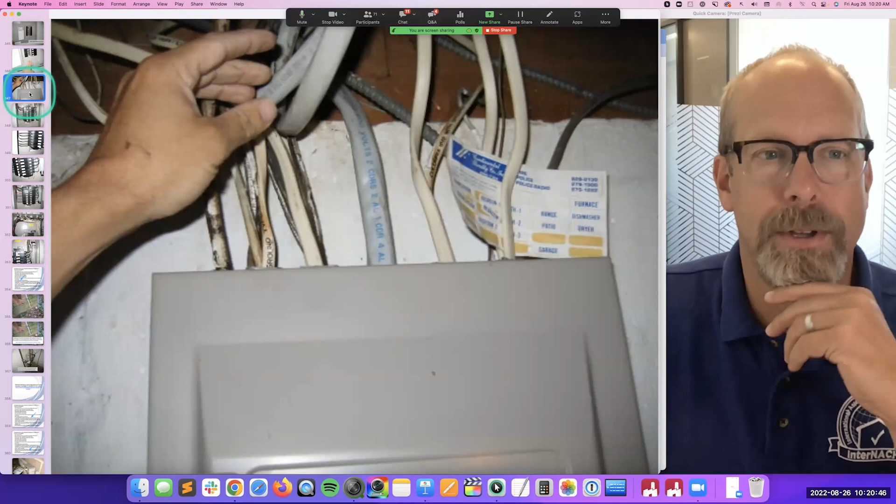Everything's capped off. They can expand if they wanted to, but this breaker has tape on it, and I bet it has something to do with that. Remember that electrical box on the outside of the house? Something's going on. I bet it's connected, but it's not my problem to diagnose.

I just know we have a problem with that box underneath the bush on the outside. It's supposed to be GFCI protected too, but I don't see that either. Service lines, you've got some modern wiring and some older cloth wiring. It's okay, you're not required to remove the dead front cover.

It's hazardous, you can get a good shock. It's not high voltage, but you don't need to remove the dead front cover unless your local authority that regulates home inspections requires it. But you don't have to. But I like to.

I keep myself safe in doing it. And that breaker, I don't know why it's taped. It looks okay, I don't know. This one isn't used, so I've got an extra breaker here. Looks okay, looks good, I see that. No defects there, see that.

Okay, service, grounding, and bonding. I don't see a rod on the outside. The upper end of the electrode should be flush with the ground or just below it. It's probably just below it, I'm not sure. If I can't observe it, I can't report upon it or describe it. But if you find a grounding rod sticking up out of the ground, that's a defect. It should be pounded back in a little bit. But there's no grounding rod here.

Bonding is required where needed to ensure electrical continuity and the ability to carry a fault current to a path to grounding. The water metal pipe here is bonded to the service equipment enclosure. That's good, and all that stuff about grounding and bonding.

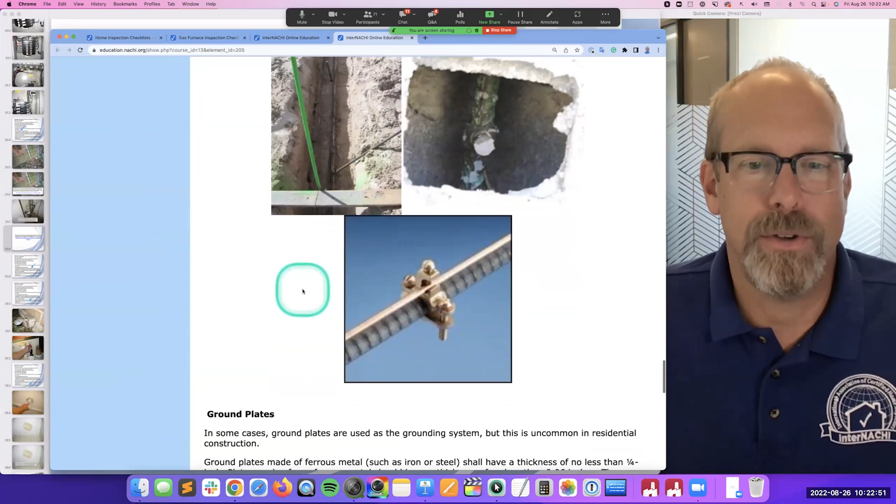If you're kind of weak in that knowledge, that's okay. Just go to that same electrical course and go to the grounding systems section. We talk about what is grounding, grounding electrodes, driven rods, corrosion, attachment, water pipes, jumpers, UFers. It's a really good course for electrical to build up your knowledge in electrical systems.

You're supposed to inspect a representative number of switches, fixtures and receptacles, including AFCIs and GFCIs, and test them, along with smoke and carbon monoxide detectors. So we have an outdoor receptacle that has some damage and should be GFCI protected. That's a problem. We're going to test the GFCIs with our little GFCI tester.

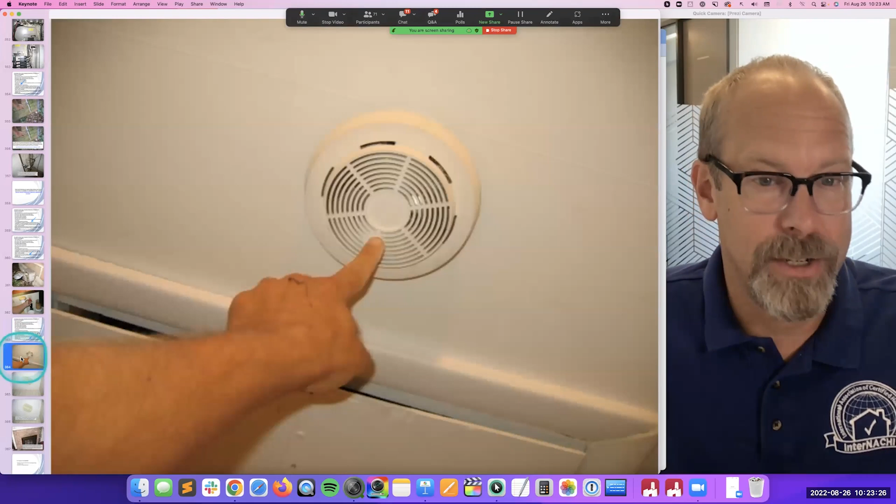Presence of smoke and carbon monoxide detectors. We've got some really old ones, they're battery operated. Ideally, they're interconnected. Modern homes would be. Smoke alarms must be powered by the building wiring with a battery backup, and they should be interconnected so that when one alarm activates, all of them do.

Outside each bedroom, sleeping area, and on each story including the basement, there should be a detector. Carbon monoxide detectors should be installed for houses with fuel-fired appliances or an attached garage with an opening to the house. We've got a fireplace here, so outside each bedroom, or inside each bedroom with a fuel-burning appliance, they should be interconnected as well. So a couple things on smoke and carbon monoxide.

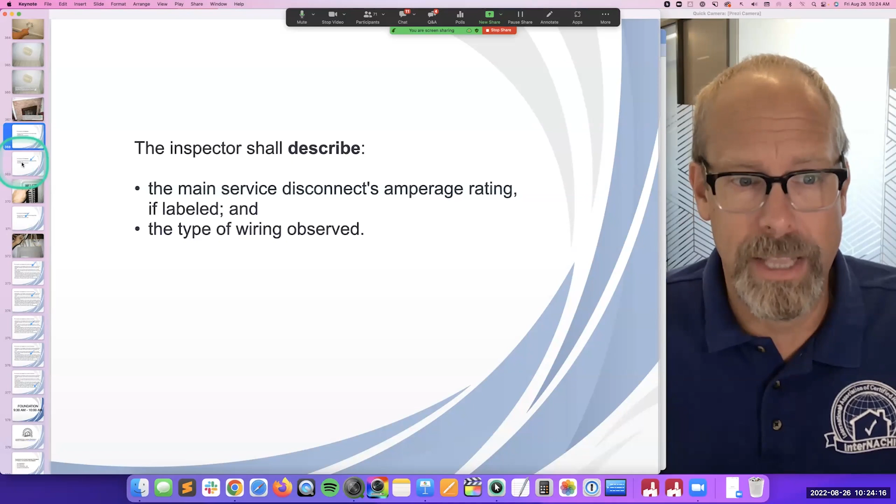You have to describe the main service amperage rating, if labeled, and the type of wiring observed. And we got that, it's 100 - one finger tells me 100. Little trick there with my pictures and type of wiring, NMB, and some cloth.

Report as in need of correction any problems with the service entrance conductors, insulation, drip loop, vertical clearances, unused breakers that weren't filled, presence of solid conductor aluminum branch wiring if visible, any tested receptacle which power wasn't present or cover wasn't in place or GFCI didn't trip, and things like that, and the absence of smoke and carbon monoxide detectors. Foundation.

It's 9:30, I'm an hour and a half in, and I'm getting to the structure in the basement. And I know I've got water problems. I'm required to inspect the foundation, the basement, crawl space, and structural components, and describe the type of foundation and location of access to any underfloor access space. There's no crawl space, so it's just a big full basement, and the inspection is restricted with personal items, stored items.

So I take pictures of these things so that if later on somebody finds something - like my client moves in and all this stuff is removed and they see a big hole right here, huge big hole, you could put a wild boar through that hole - well, I couldn't observe it at the time of the inspection, and I have a picture to prove that. I didn't see it. I can't report upon things that I can't see during the inspection, at the time of the inspection. So there may be a defect right here, but I'm not required to report upon it if I don't observe it.

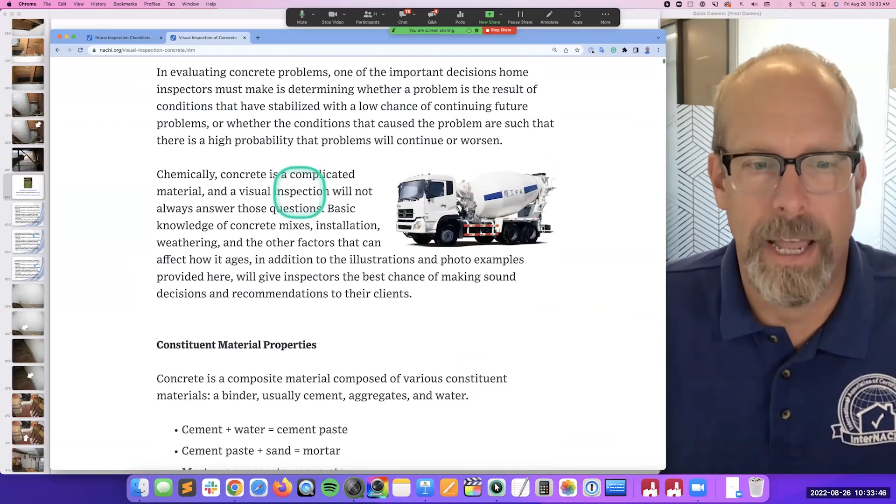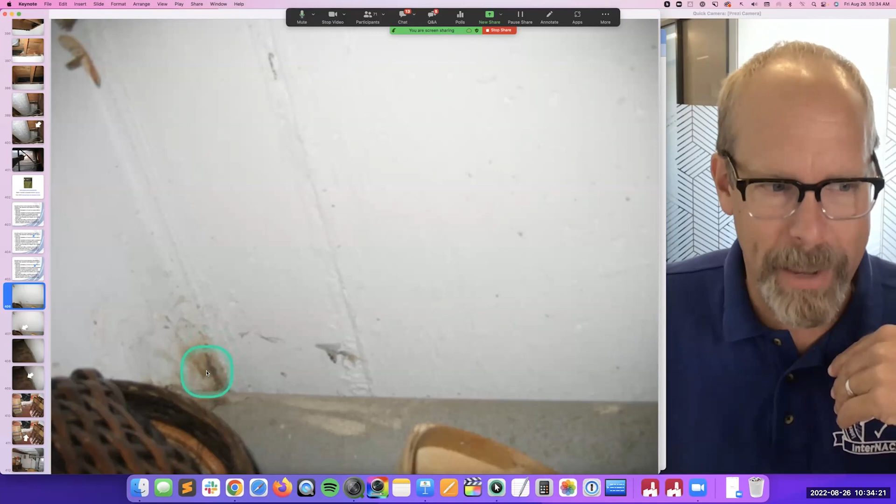And this is what we are required to report as a need of correction: observed indications of wood in contact with or near soil, observed indications of active water penetration. This is the fun part for me. Right here is the foundation, poured concrete, reinforced poured concrete foundation, and a separated concrete floor, but bam, right there - that's observed indications of active water penetration.

Is it wet? No, it's not raining, but it was wet, and there are multiple layers of watermarks, and there's mud coming through. So that's observed indications of active water penetration. Is the floor wet? No, it's completely dry, but look at the layers, the rings of water. So for some reason, this wall here is actually flowing in, and it carries dirt with it, and then it dries. Every time it rains, it comes in, puddles up, and then it dries. So this is a lot of fun, and it just makes sense now.

Now I'm trying to put this all together and make a nice story about this house. And the story of this house is it has water problems, and there are observed indications of active water penetration in this house.

When it rains, it seems like everything's controlled on the outside. There's that one downspout, but the ground, for some reason, isn't diverting water away from the house. They know this because they brought in soil and have been working on the window wells, and the window wells aren't draining - they're filling up, and water is going down the outside of the exterior foundation wall and then coming into the house, leaving watermarks there. Telltale signs of indications of active water penetration.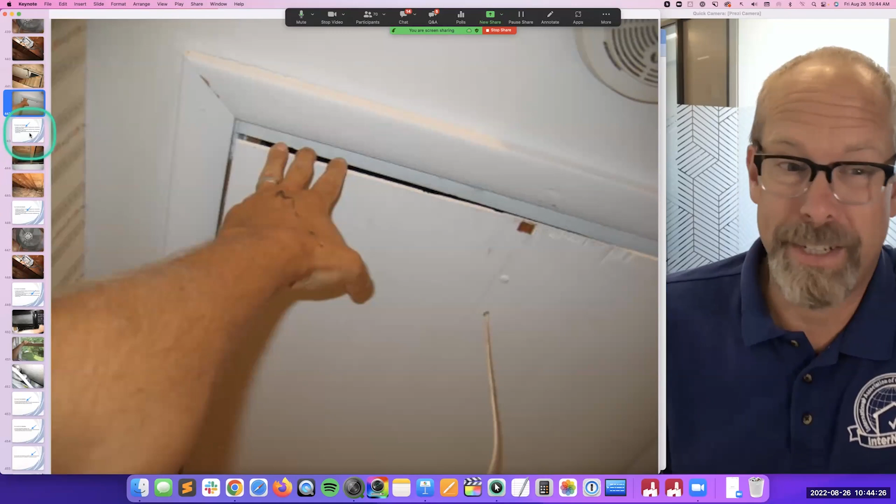We have to inspect the insulation in unfinished spaces, including attics, crawl spaces, and foundation areas. There's the foundation area, there's the attic, no crawl space here. Inspect the ventilation of unfinished spaces, including attics, crawl spaces, foundation areas. The attic fan, I couldn't get it to turn on.

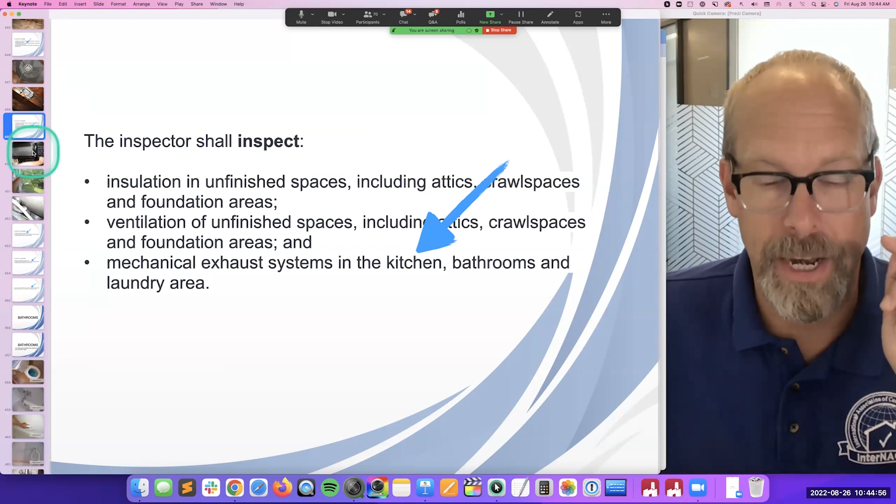Mechanical exhaust systems have to be inspected in the kitchen, bathrooms, and laundry area. Every kitchen should have an exhaust that goes outside, same for the bathroom and the laundry for sure. In this kitchen, the microwave is the ventilation fan, but it does not go outside. In this house, the bathrooms do not have a mechanical fan, but a window is just fine. If it doesn't have a fan and it doesn't have a window, that's no good. It has to have one of them.

Both would be great, because you don't want to open your window all the time in a cold climate every time you need it - let's say when you're going to the bathroom, or when you're taking a shower. So a mechanical exhaust system should be in a bathroom, and the laundry for sure has to go outside - that's the laundry exhaust.

Describe the type of insulation and approximate depth. Report as in need of correction any general absence of insulation or ventilation in unfinished spaces. And then the bathrooms, you can group the bathrooms together in your inspection report.

Basically, when I come out of the attic, I'm going to do the entire interior, including the garage, and get to the kitchen. That includes the bathrooms, but in my report I'm going to group them together.

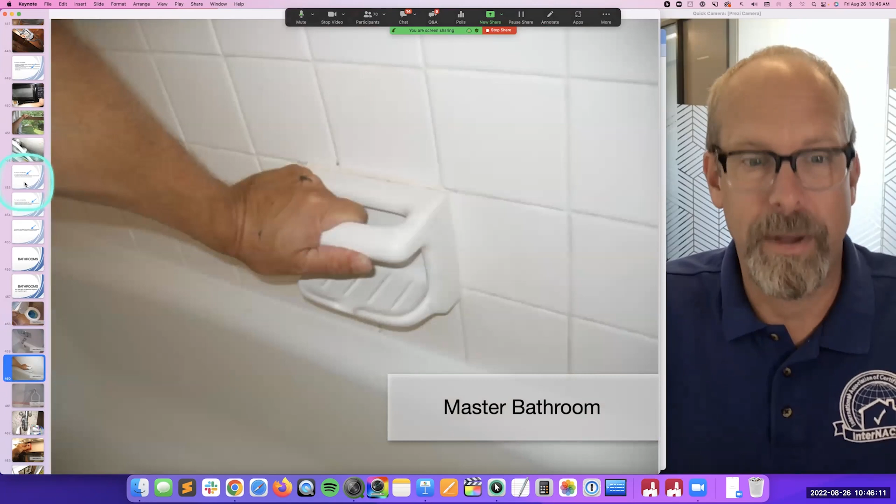So this is the master bathroom. Flush the toilet, get to the tub, hold on to the handle, take a look for leaks. There are no GFCIs in the bathroom. The plumbing access panel for this master bathroom shower is open. I run water, try to get it to leak. It doesn't. There's a window.

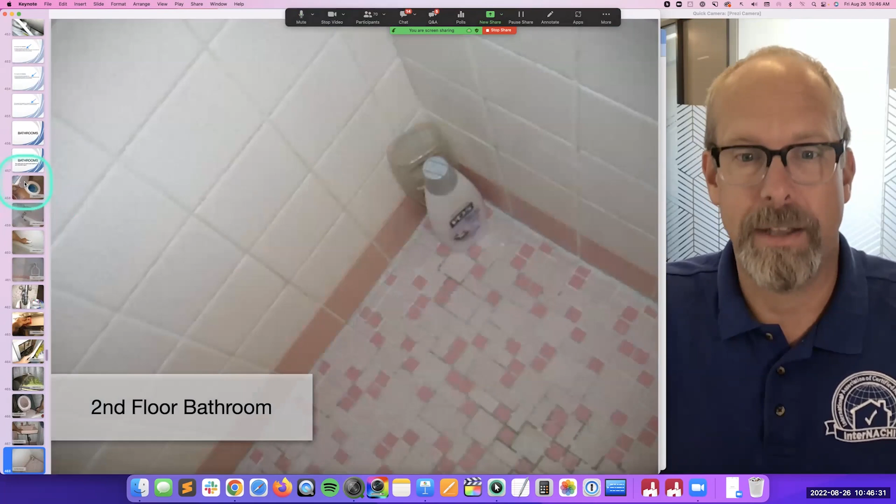Second floor bathroom, second floor sink, shower. I pound on the tiles. If my hand goes through the tile, fantastic - that's my job, my job is to find problems. And if I can cause damage by pushing my hand through a tile, which should never happen, good job. You're supposed to do damage.

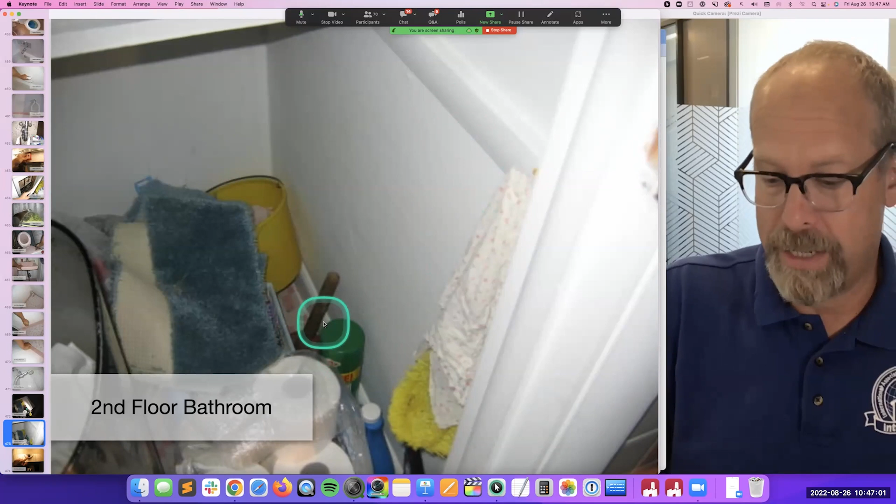There's a shower and a plumbing access panel - I can't get to it, it's painted. There's stuff all over the place, but this is the plumbing access panel. There's a shelf in the way and it's painted up and there's all kinds of things, but I would like to open up the plumbing access panel.

No GFCIs, and that's the only receptacle there as well. Same window. The tile is in good shape - they covered it, so I don't tell anybody, but I move the carpet just to see what's going on, see if I'm going to get caught with something being hidden. There's nothing going on here.

Then this is the first floor half bath. Remember, this is where the toilet is leaking, right? This is vinyl, I don't know why it's not tile - vinyl, they replaced the tile, maybe they had wood or something. And I moved the toilet - everything looks good, but it is leaking.

Sink, everything looks good there. Interior. So the interior may include floors - it will include floors, walls, ceilings, windows, doors, lights, receptacles, smoke detectors, bathrooms, attached garage, and kitchen, right?

And I'm going to do that in less than an hour because I want to finish up around 11 o'clock. Then I want to get paid, get in my truck, go find some food or open up my food - my spouse prepares delicious lunches for me all the time that I can eat in my truck. I go over my inspection report, maybe finish up the report or prepare for the next one, chill out a little bit, find some coffee, get to the next house early and start this whole thing again and try to make another $500 and bring home $1,000 to my family at the end of the day. What a great way to make a great living.

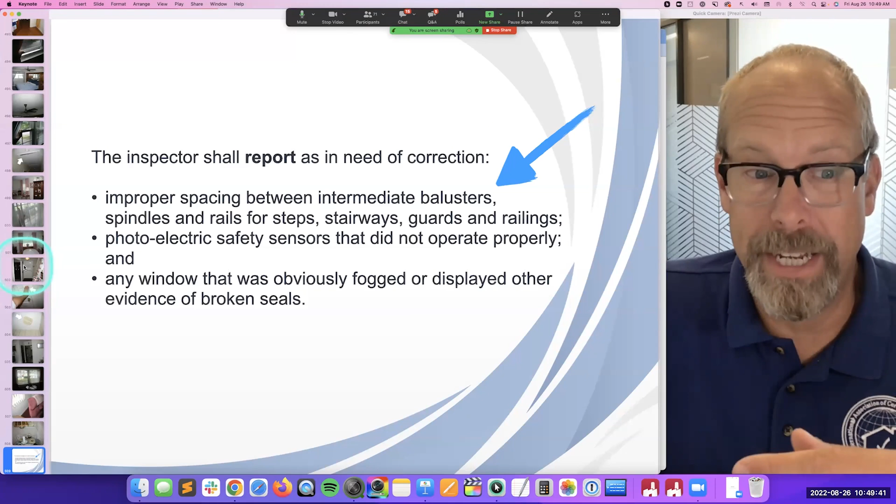I don't find any of these problems. I'm into the fireplace - remember, we have a fireplace. It's a wood burning fireplace, masonry, not factory built. The interior looks good - I'm looking at the surfaces, the brick, the mortar joints, the hearth.

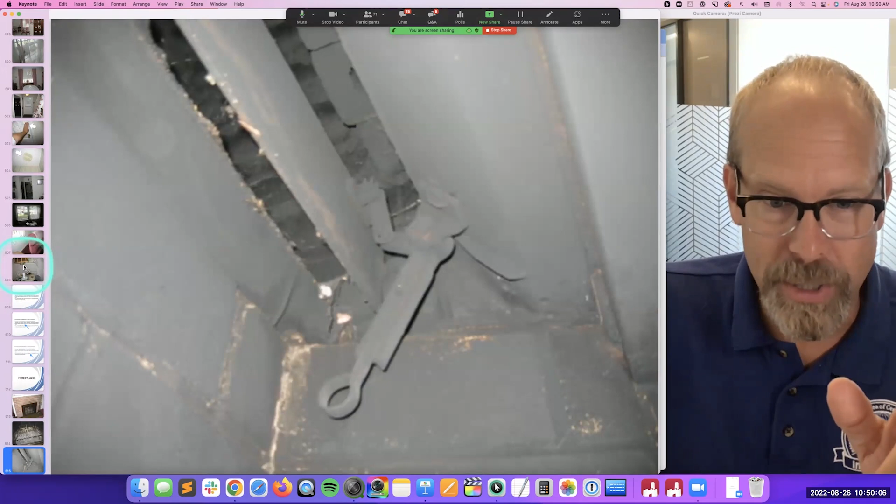There's the damper door, I'm required to open and close it. I can try to take a look at the flue - I don't have to, I'm not required to, but I may look at the throat and the lintel and the fire condition of the walls and the mortar joints.

It all looks good. I have to inspect the visible portions of the fireplace and chimneys, the lintels, the damper doors by opening and closing them, and the cleanouts if there are any - there isn't any cleanout. This is not an ash pit.

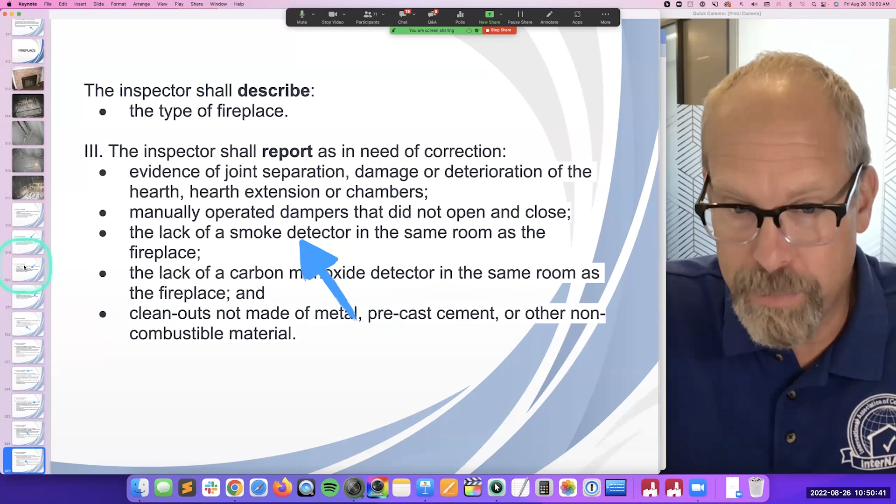I have to describe the type of fireplace, report evidence of joint separation or damage, hearth extensions, or dampers that didn't open, lack of smoke detectors, lack of carbon monoxide detectors, and cleanouts made of improper material.

Then the laundry, there's a laundry section, I tucked that into my inspection report. In the interior, it's a 5-minute inspection. Every receptacle needs to be GFCI protected or a dedicated receptacle.

The rubber hoses, they're not pressure tested. Replace them with stainless steel pressure tested hoses of some kind. Looks like the electric dryer is in good shape and it's discharging outside. Run water at the laundry tub, there's no leaks there.

There's a garage. It's actually attached to the house. There's no interior doorway, no fire door problems, no door in between the attached garage and the house interior. That's why it's like attached, it was added on to, which is why we had that different kind of roof section and things like that.

So there's the manual garage door, it opens and closes. There's an electrical connection that should be in a box and properly done. It's not, so a little defect there, but it's easy to fix.

There's an exterior door at the back. There isn't a doorway through. It's masonry concrete block in between the house and the wall, so there's no fire problems. And there's a window there, a single pane window, and there's drywall on the ceiling, so no firewall breach problems.

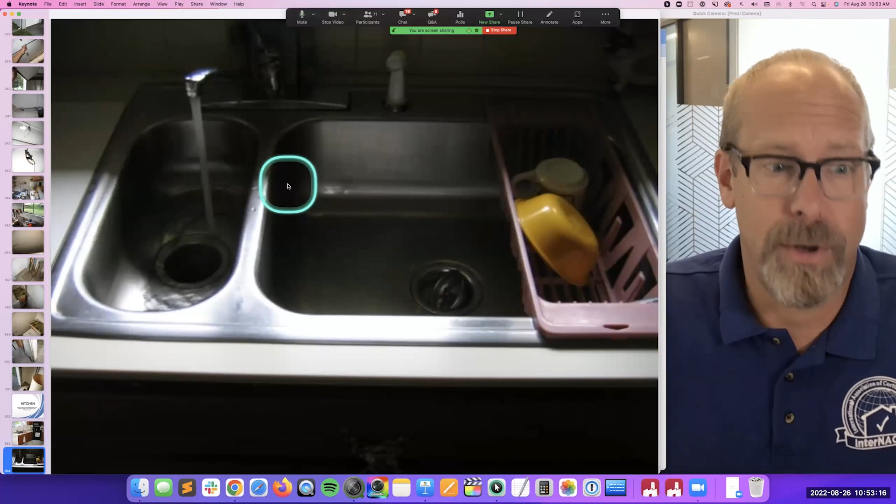So the garbage disposal works, no leaks. The dishwasher runs, no leaks. I test the GFCIs, there's one there that is not GFCI protected, I point to it for my picture. And then the stove is gas and the microwave works, but it doesn't exhaust outside.

Then I go over the report and the summary and a review, and I finish off the story. I tell the story of the house to my client, and they still love it. The story really is, it's got water intrusion problems, every time it rains I bet there's some water stuff going on in the basement, but it's not a mystery, it can be fixed. All water problems can be fixed.

You probably want to fix these, right? You don't want to live in a house that has water in the basement every time it rains. That's about it, I'd move in, I'd buy it. Sounds good, here's my report.

I like to make it pretty with pictures and essential information. There's a table of contents, some general information about my client and who was there, buyers were there, agents were there, who was there. And then on the third page in, I want to make it very clear about what really matters in a home inspection.

This is an article, one of the best articles written by my brother, Nick Gromicko, founder of InterNACHI, for the industry. It says, congratulations on buying a new home, the process can be stressful. A home inspection is supposed to give you peace of mind, but often has the opposite effect. It just says, relax, focus on what really matters.

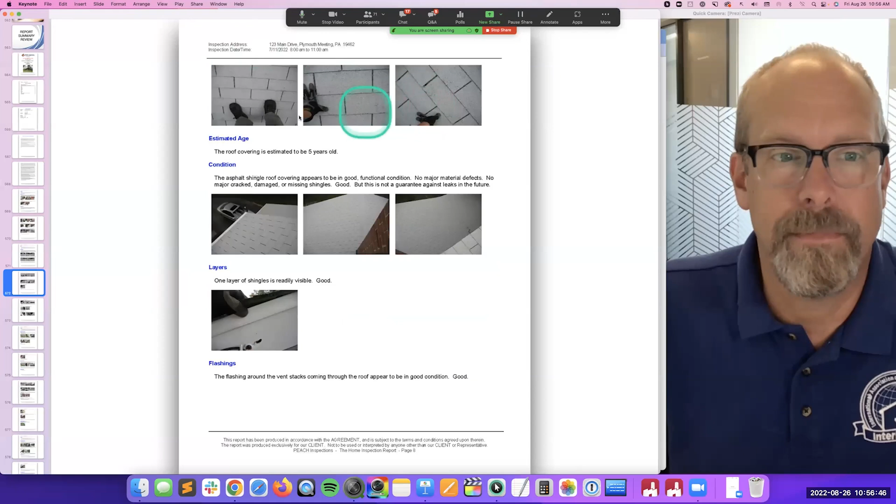Here's the pictures. We've got pictures of defects, pictures of good things and pictures of bad things in the report. There's the flashing, and the chimney interior, and the roof covering materials, pictures of good stuff. I like pictures like this so that when somebody reads my report, they think, oh, this inspector gets on the roof.

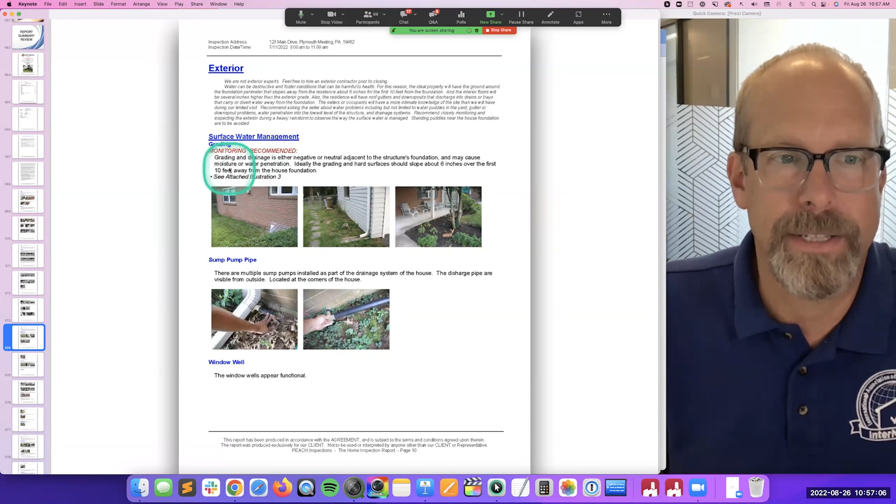And there's the roof fan, remember that? Couldn't turn it on. Then the gutters. Then I got a problem with these pipes, I'm not sure what's going on. And the grading, I say the grading should be sloped away from the house. Got some window well stuff going on.

And the hose bibs, some people make this a big deal. Right now, like these other problems, they're not really problems at all. You've got to focus on what really matters, and that's the water stuff. This is not even a problem. This GFCI thing and the tree, no big deal.

The cooling, that's awesome, it's new, it's working well, but it's draining into the sump pump, and then the sump pump discharges into the thing. We already know that. The toilet leaks, got to fix that. Water coming in, pretty good. Hot water.

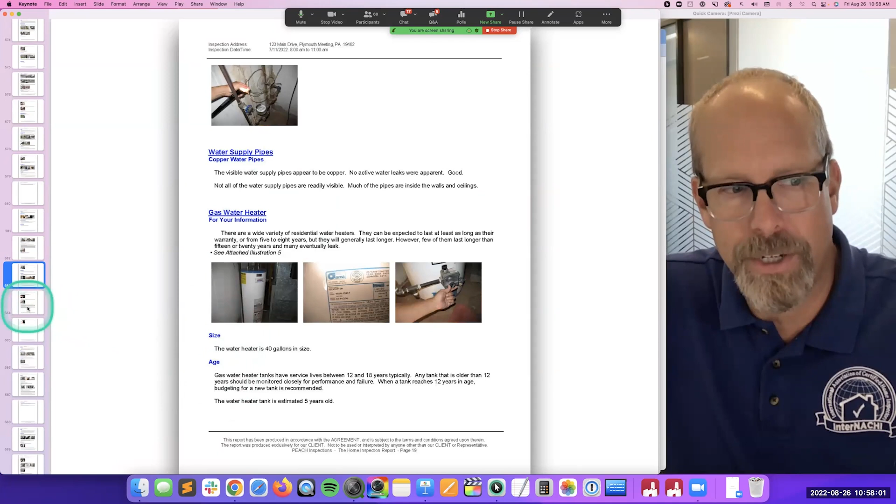The hot water system is like a system, a gas hot water tank. Then I break it down into components like the size, the age, shutoff valve and connectors, gas shutoff valve, and relief valve. So we need a TPR discharge pipe. That's in the report, which right now is no big deal, because it's really the story about the moisture intrusion.

There's the electrical panel and panel system, and then I break it down into components: main disconnect, panel size, breaker labeling, wire type, circuit breakers, grounding, bonding, inspection sticker. Then the heating system, that's in good shape.

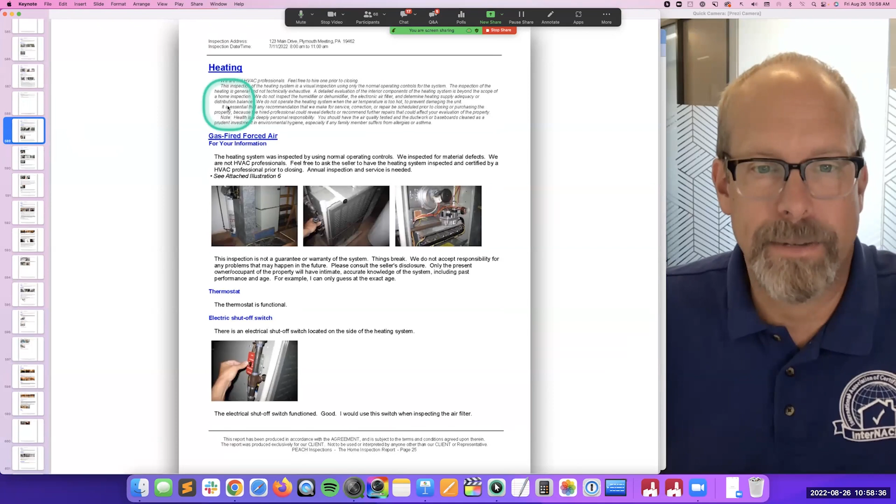I think the pictures help. Don't want to overflood with pictures, but no pun intended.

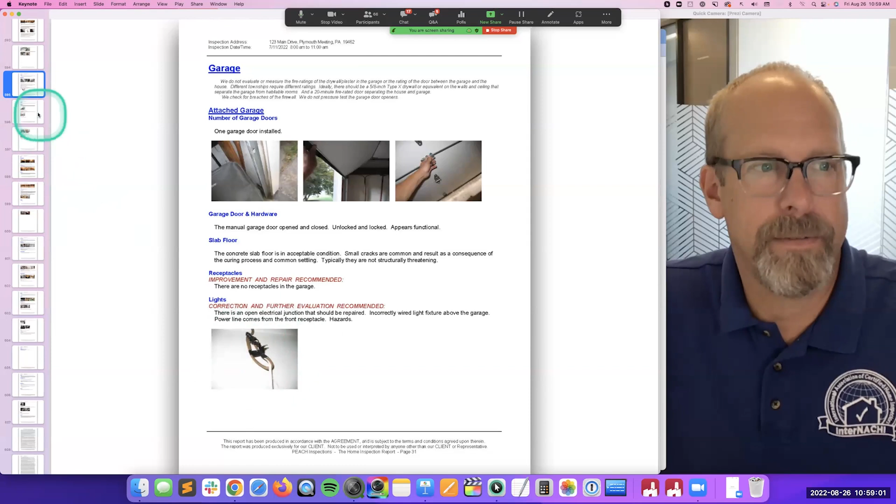And then we've got some problems, right? Correction and further evaluation recommended, visual signs of water penetration. We've got some problems here with the sump pump, attached garage, we need that electrical thing to be fixed. The hoses of the laundry.

And then the attic, the structure looks good. Had roof leaks in the past, just, I know, this is commonly found in older homes. I'll just read you what I read. And by the way, you can take any of my inspection reports and copy paste the heck out of it. I don't recommend using my exact words because I speak in a certain way, slight dyslexia, so I just speak in different ways.

So what you want to do is compare your inspection report with master inspectors, and you have my permission to take any words from me and use them as your own, but you should write your reports as you speak. So your client feels this flow, like you were inspecting in a certain way, and now you're reporting in a certain way. But I'll just pick one paragraph.

I said, the house had roof leaks in the past, indicated by the watermarks or stains on the roof decking and the components here and there, visible from the attic space. This is commonly found in older homes. No major structural damage. Ask the seller about prior roof leaks. Monitoring is recommended. I'm not freaking people out. It's an older home, probably leaked in the past. No big deal.

Bathrooms. There's the bathrooms, all the toilets. I don't know why they put that blue stuff in there for my inspections, but they think it's kind of neat. And then the bathroom fan doesn't exhaust outside. The kitchen doesn't go outside either.

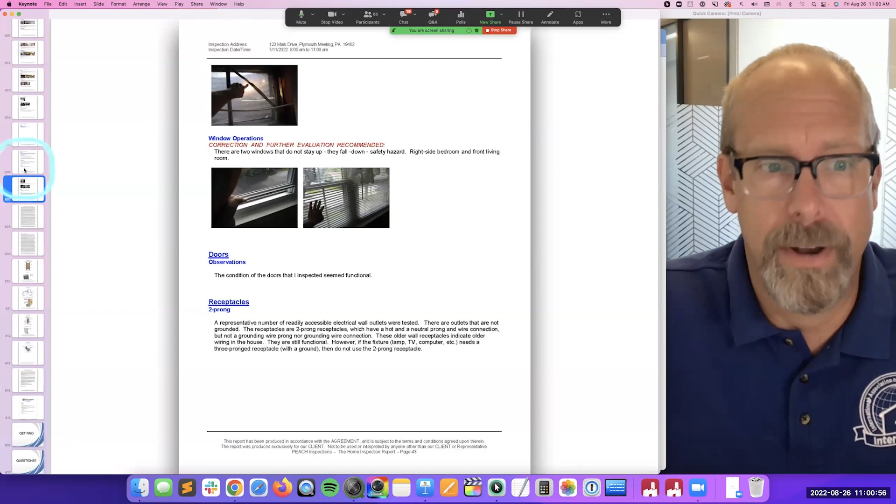An abbreviated summary of the standards of practice. I like to give my clients the actual standards of practice by linking them live to NACHI.org SOP so that we're all on the same page. In the agreement, I ask them to read the standards of practice and agree that they have read and understand everything in it. If they didn't, they had time to ask me, so that I set their expectations for when they maybe find a problem later on.

We will have already, we'll be on the same page. They'll say something like, well, my contractor ripped open all the drywall and they found things inside the wall like termite infestation and you didn't see it. Well, the standards of practice, you agreed that you read it and it clearly states that I'm not required to find defects inside walls.

Illustrations. InterNACHI's gallery is fantastic. It makes my inspection reports look a heck of a lot better. Look at this, really nice illustrations about shingles, 3-tab shingles, grading around the property, that hose bib. We have it in Spanish as well.

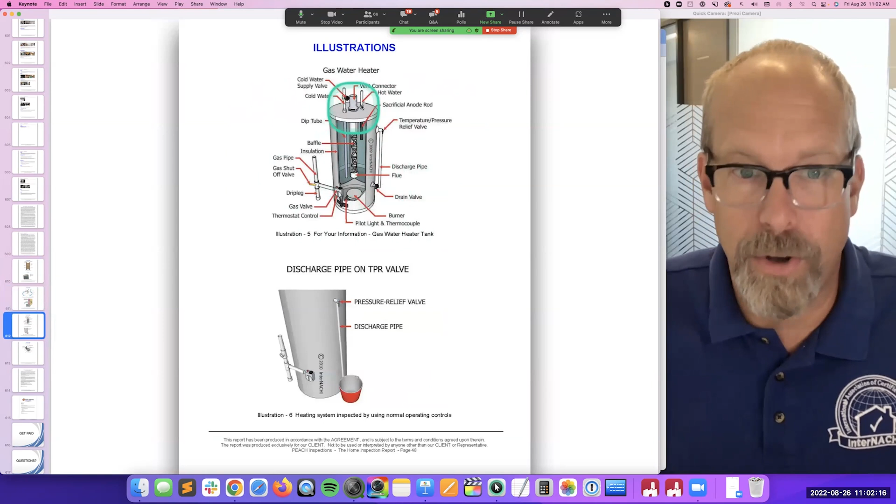Gas tank illustration, all the components, and this is what is missing here: this TPR valve, temperature pressure relief valve, it's on the side. And it just looks like the picture that I took, with my finger pointing, and now it's a red arrow in a really nice illustration. And there's the humidifier, a really old humidifier that describes everything about its components.

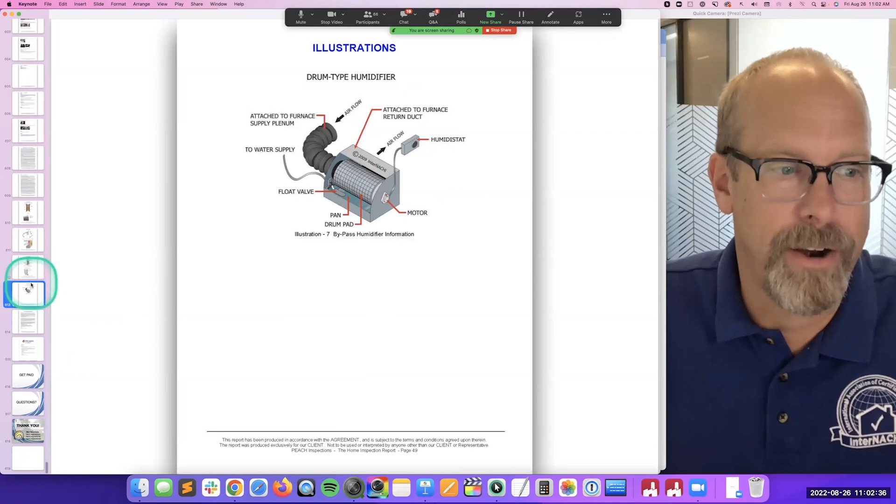That's really nice. And then there's a report conclusion, and a reminder about pre-closing walkthrough. I'll have an automatic email and or text that reminds my client to hire me again. I can do it for free or maybe for $100 as a pre-closing walkthrough to find those defects that weren't observable during the actual inspection.

And then I tell them, if you're not going to hire me, do these 10 things. When you walk through the house, don't just look around. Tell the agent, I'm going to do these 10 things: I'm going to check the heating system, operate the appliances, run water, operate all these things, smoke detector, and ask this and read the seller's disclosure one more time. This is pre-closing. Ideally I would be with you, but if not, I'm going to give you 10 things to do.

And then if there is any complaint, like, hey, I just moved in and the gas stove doesn't turn on. Well, did you read the report? Yeah. Did you do number 2, operate all appliances, in your pre-closing walkthrough?

Okay, this is a letter that I leave on the kitchen counter for the seller or the property owner. It says, we understand that the home inspection can be a stressful process. That's a nice first sentence. We make every effort to respect your home and leave it as we found it. All of the inspectors wore indoor shoes only, those kind of shoes. So if there's a shoe mark on a white carpet, wasn't us.

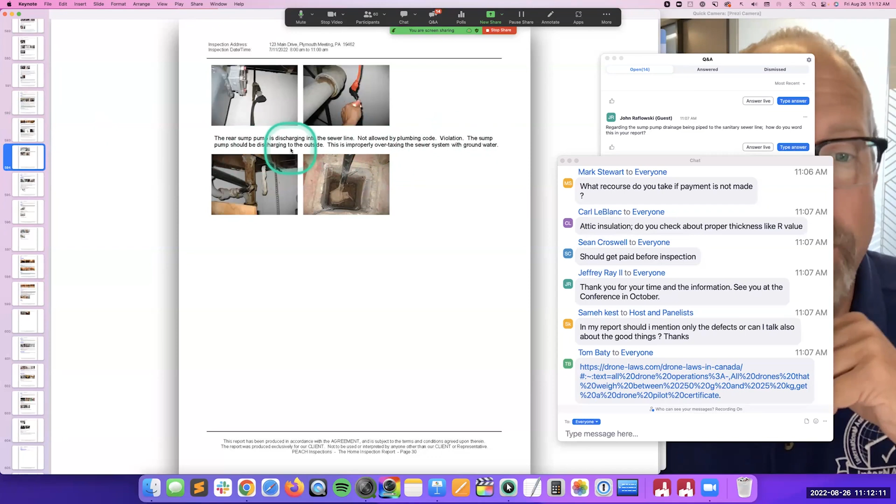Regarding the sump pump pipe to the sanitary, how do you word this in a report? Let's go back to the report. I wonder how I worded it. The rear sump pump is discharging into the sewer line, not allowed by plumbing code, violation. The sump pump should be discharging outside. This is improperly overtaxing the sewer system with groundwater. Correction and further evaluation recommended by a contractor.

Is it common for homeowners to hire a home inspector for proper maintenance of the house? No, it's not common, darn it. It should be, that's my goal. I want every homeowner to hire a home inspector as part of a maintenance program. Good question, but it's not common.

That is the problem. And if you go to other countries, a home inspection is not common during a real estate transaction at all. It's only in the United States and Canada where it's common. We spent decades educating the public about the value of getting a home inspection before you buy a house or commercial property, so that's pretty much standard now. But in Europe, South America, that's not common at all. South Africa, somewhat common. Australia, a little bit. It takes education. So if you're in an area where home inspections aren't common, you have to start educating real estate agents. Do several free inspections for real estate agents and tell them, this is a pretty cool thing.

No, to sharpen, I'd go here: nachi.org/CPI-requirements. This is the requirements to become a certified home inspector.